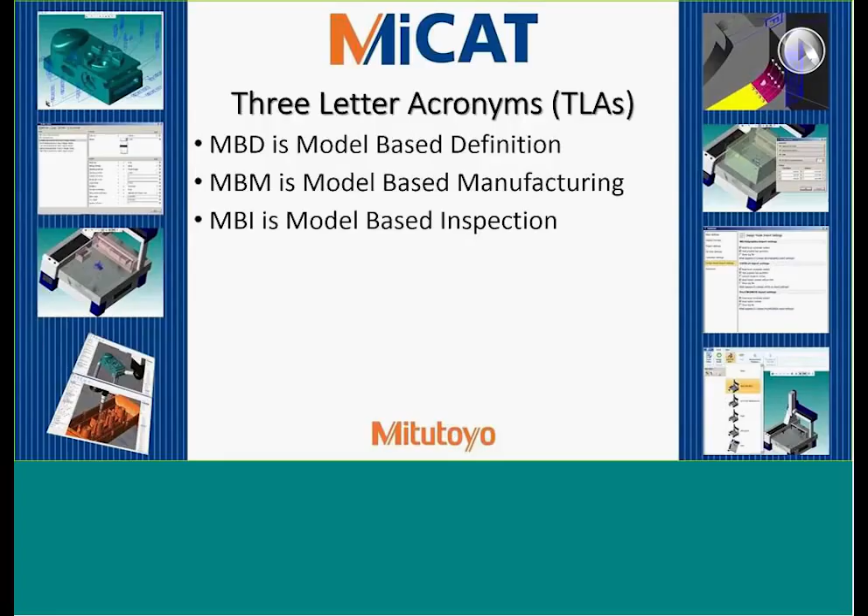The first one is model-based definition. You've also heard the term design model or CAD model with PMI, but MBD is the term of choice that we hear most often here in the USA. With MBD, there's model-based manufacturing, and I'm sure that's self-evident. The next one is model-based inspection. So these three, MBD, MBM, and model-based inspection, are the primary model-based terms that we use for what might be called model-based environment or model-based enterprise.

PMI is another term that you'll hear. It's product and manufacturing information. It's also that annotation in GD&T, and we'll talk about that in just a bit as well. The last of our TLAs is DME, a term that encompasses all of dimensional measurement equipment. These terms are going to be used throughout the webinar.

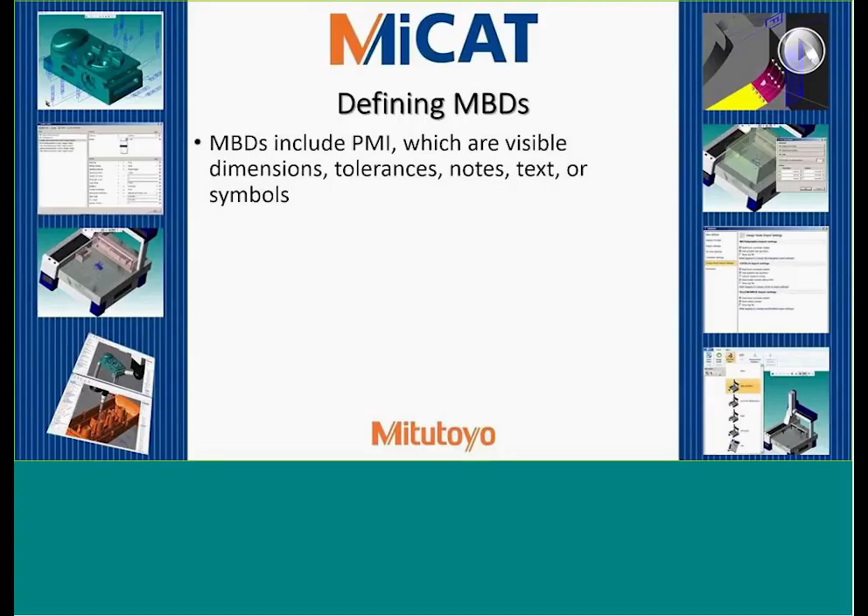Let's talk about MBDs first. What are they? So let's define an MBD. MBDs include PMI, which are visible dimensions, tolerances, notes, text, or symbols. I'm sure most, if not all of you, have seen this kind of annotation on a 2D drawing or 3D CAD model before. MBDs are specifically created by design engineering, but their use is by manufacturing and inspection.

Go ahead. There's a question. Please interrupt me at any time, Dirk, and I'll try to make sure that I answer questions as we go along.

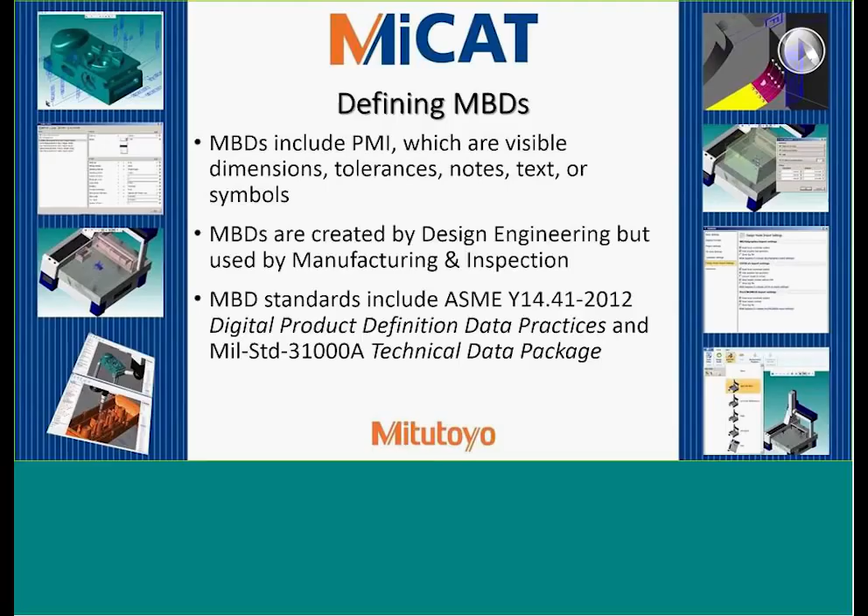There is something called MBD standards that I wanted to bring up as well. The two most prominent general standards are ASME Y14.41, Digital Product Definition Data Practices, and MIL Standard 31000A, Technical Data Package. So if you want more information about what an MBD is and some references and guidelines, I would steer you to these two standards as well as others that are available for MBD.

There are two kinds of PMI, and this is a critical topic for MBDs. The first kind of PMI is presentation PMI. It visualizes the PMI for the person.

It essentially, and I'm sure you've all seen this before, creates a three-dimensional drawing. And it may be organized by views in the CAD software. The other one is called representation PMI. It complements presentation PMI. So you have these two terms.

The first term is the visualization for the person. The second term is for the consumption by the software applications and the generation of the MBD by the software applications. It's also known as semantic PMI. And this, as I said, is what enables model-based inspection.

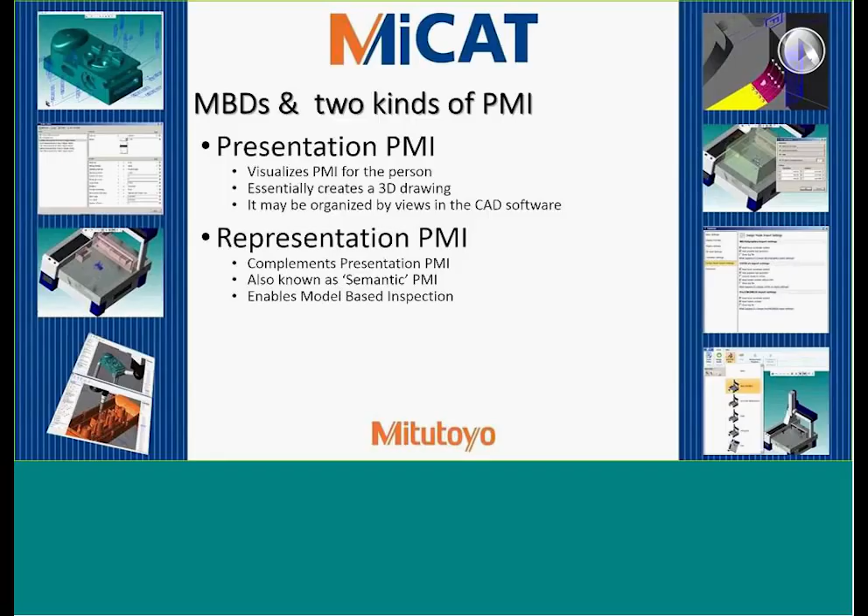This is a very interesting note from Joshua Lubell at NIST. He states, unambiguous representation and presentation of PMI are critical for the digital product definition. In other words, we need both for the machine and for the person. They need to be there, they need to be synchronized, and they need to be complete and unambiguous. And those are considerations when a CMM might use an MBD for model-based inspection.

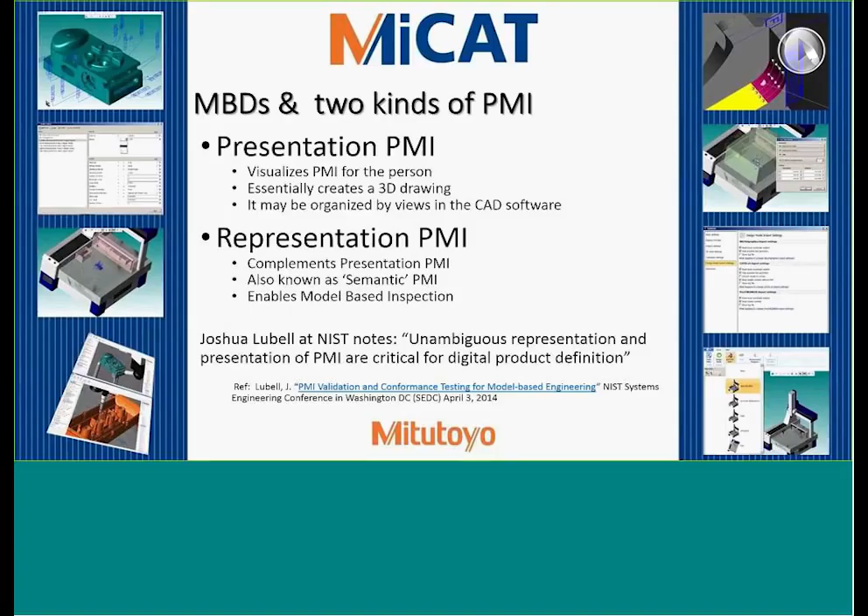There's a process, a journey that I think all of you would recognize here. The journey is we all started off in a drawing-based workflow where the 2D drawing is the master. There's an intermediate process, a model-centric workflow where the 2D drawing is the master and the 3D model provides part geometry. This is probably the most predominant workflow now as we move from drawing-based to model-centric.

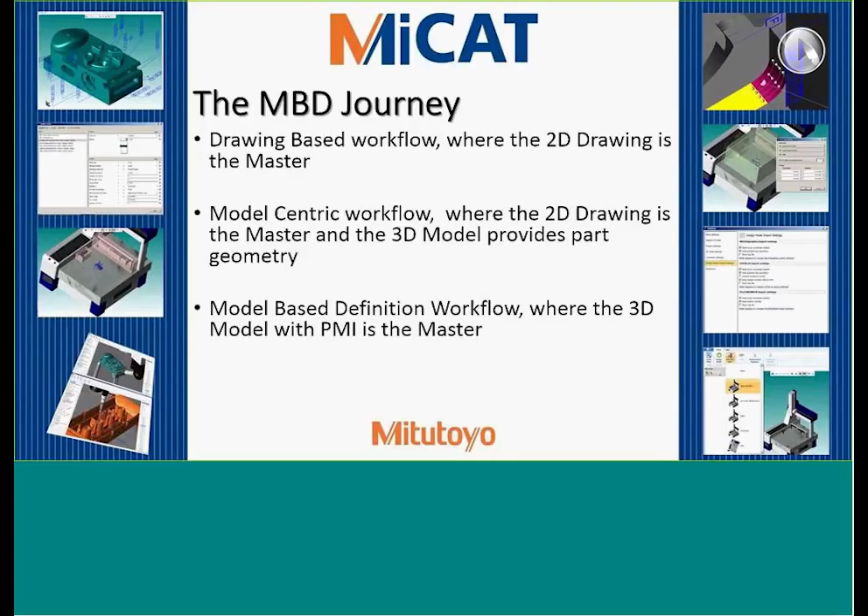But we're moving further to a model-based definition workflow where the 3D model with the PMI is the master. So you can see a progression from drawing-based to model-centric to model-based definition. And we'll be addressing really the second and third of these, model-centric and model-based definition, in today's webinar.

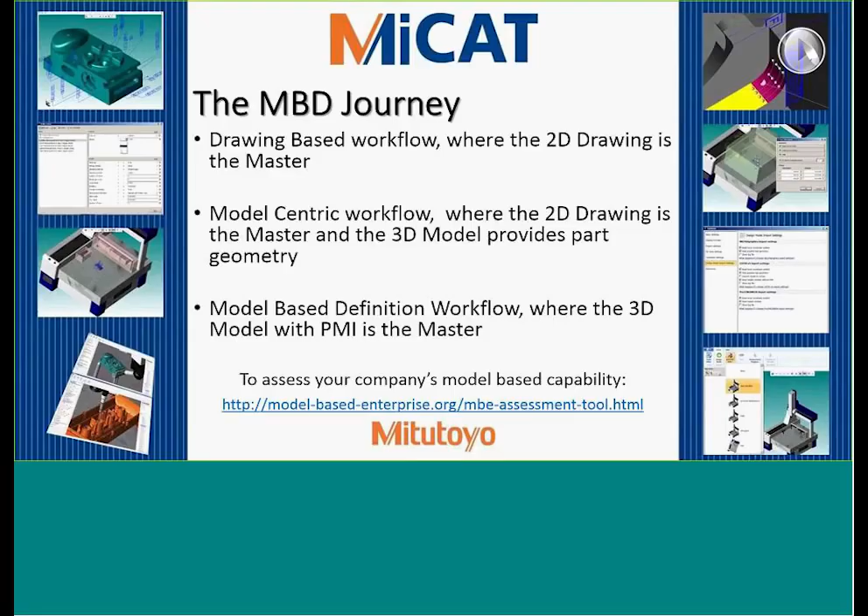If you want to know more about this journey, this is a reference that you might want to go to. It's at the Model-Based Enterprise website, and it's an assessment tool that you can take for your company to see where you are in this progression to model-based workflows and model-based enterprise.

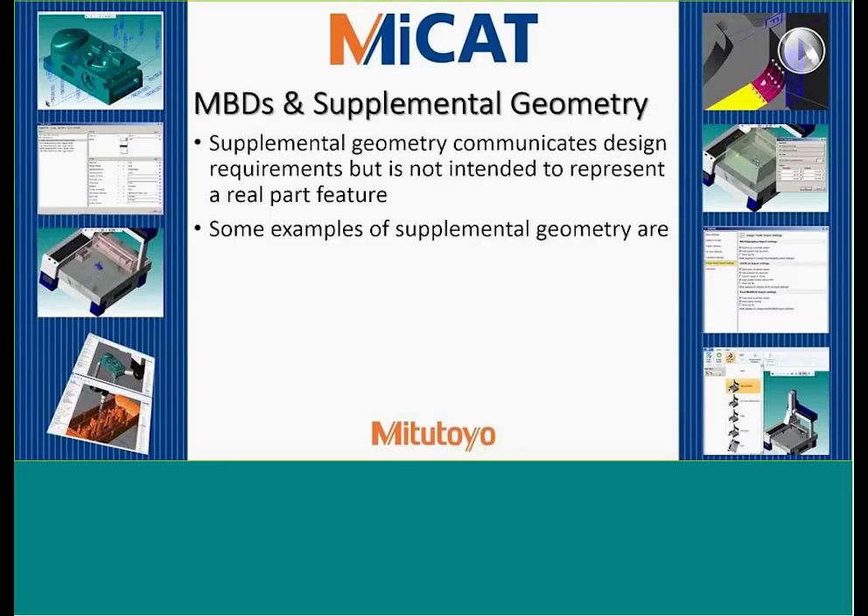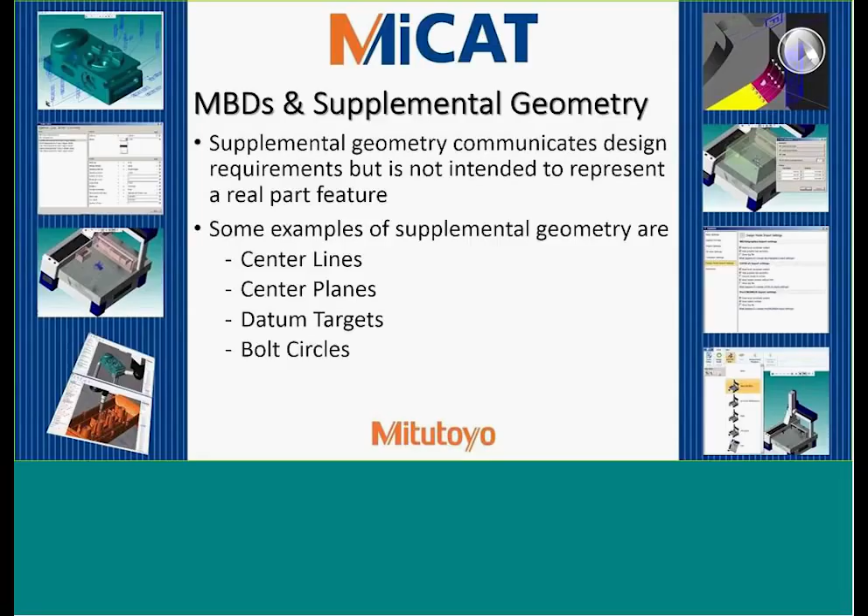Questions before we proceed? Dirk, anybody about model-based? No, I don't think we have. Well, actually, here's a question I have. Let me just throw this out. As we're talking, I was wondering, why is PMI actually needed? Maybe your CAD files already have your dimensions and tolerances all worked in there.

Good question, but PMI is actually the dimensions and tolerances. So the GD&T that you see, the notes, the annotation, that's all part of this larger umbrella called PMI. So PMI is necessary, and certain kinds of PMI are essential for model-based inspection. You can see these three CAD models, and they all have GD&T, which is a type of PMI, and this is the kind of MBD that's necessary for model-based inspection.

I'm not super familiar with all this, so maybe some of our attendees aren't either, but is PMI something separate that's embedded inside the CAD file, or suppose they just had their CAD file marked up with GD&T stuff. Is that the same as having this information embedded in PMI? Yeah, I understand that distinction.

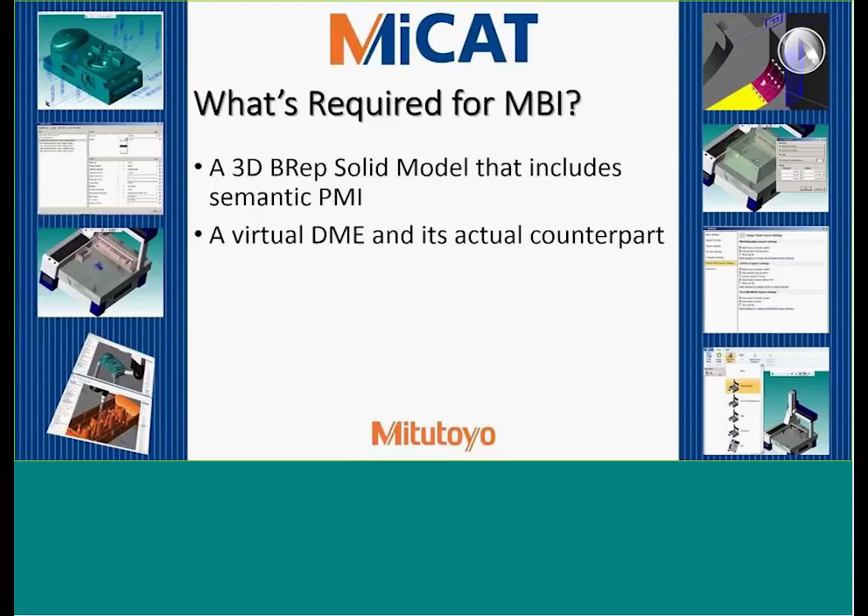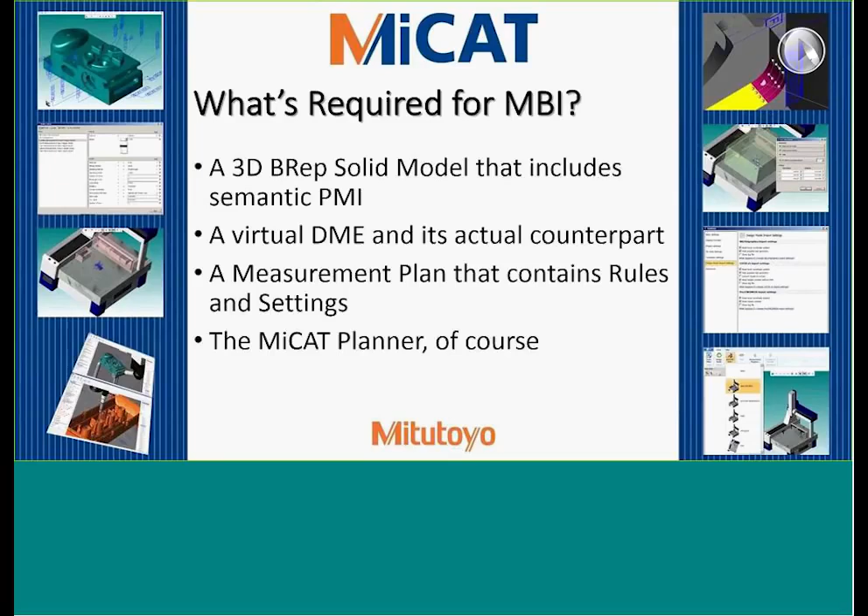We need what's called a virtual DME. This is a virtual process where we take information that's virtually designed as a CAD model and use it with a virtual DME, dimensional measurement equipment. But obviously, to inspect the real part, we need the physical, actual CMM as well. We also need, especially for automation, a measurement plan that contains rules and settings. And last but not least, we need the MiCAT Planner, of course.

So moving on, let's take a look at each of these categories. Dimensional measurement equipment. Model-based inspection is most often used with CNC DME. CNC are automatically programmed machines and automatically executing machines. It can be done with manual machines, but the biggest benefit is with CNC DMEs. The most common CNC DME is the coordinate measurement machine, aka CMM. I think we've all heard of these machines, and you can see some of these in the Mitutoyo slides here, and we'll talk about these in a little bit as well.

And just to let everybody know that it doesn't have to be a new machine. Most current as well as new Mitutoyo CNC CMMs support model-based inspection, but they must have the additional option of the MiCAT Planner to enable this model-based inspection workflow. Okay, we'll move forward.

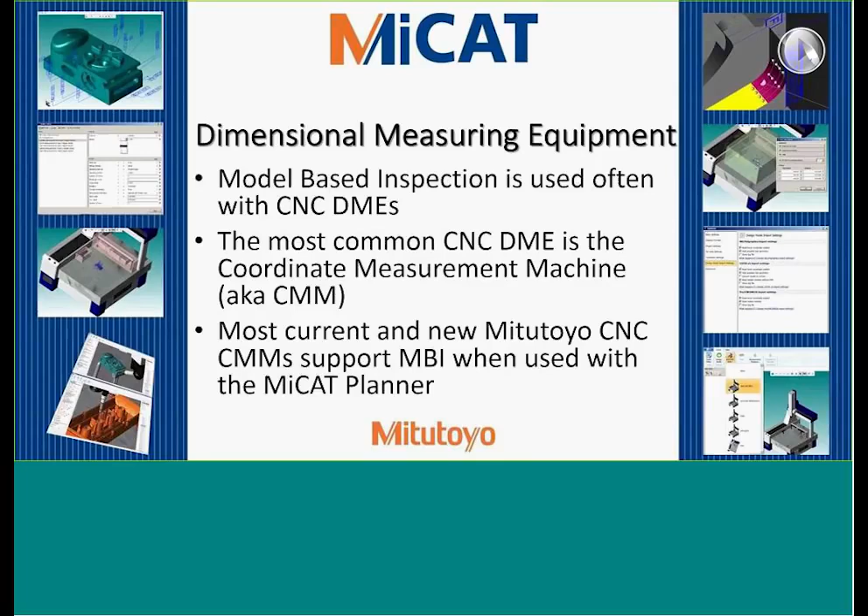Now we're getting down to some really interesting technology here. These are sensors for model-based inspection. And sensor selection plays an important role when matching rules and settings to features and characteristics of the MBD, or binding, to use that term, the sensor and the feature and the characteristic. The feature is a cylinder, the characteristic may be cylindricity. Now, what particular sensor do I use in a model-based inspection workflow that's most appropriate for that feature and characteristic?

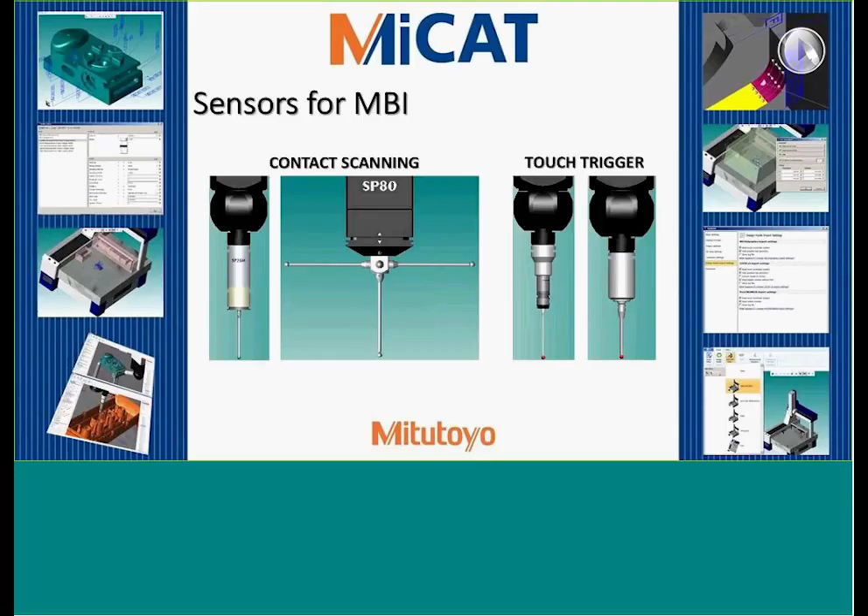We support, for our model-based inspection workflow, these kinds of contact scanning, very common sensors, as well as touch trigger sensors. And I'm sure you've all seen these before on typical CMMs.

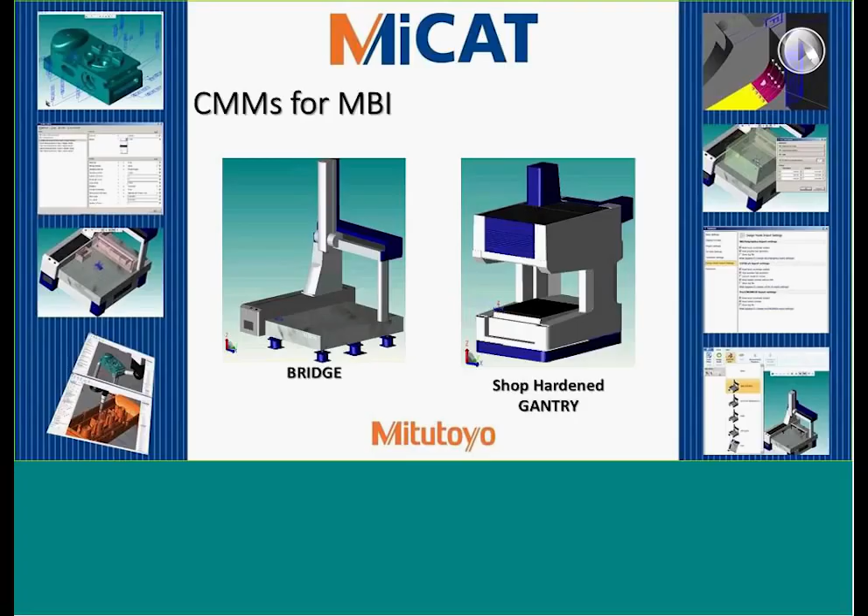Now, what kind of CMMs does Mitutoyo offer that support model-based inspection? We have bridge machines. That's probably our all-around workhorse for parts and assemblies. We also support horizontal machines, and we also support shop-hardened gantry machines as well. So you see two examples of vertical axis machines. One is a typical workhorse, and one is actually used for inline or nearline production.

What other CMMs do we have available for model-based inspection at Mitutoyo? We have also shop-hardened horizontal arm machines as well. And last but not least, the change racks, modules, and styli all contribute to this virtual DME, virtual CMM environment that enables model-based inspection.

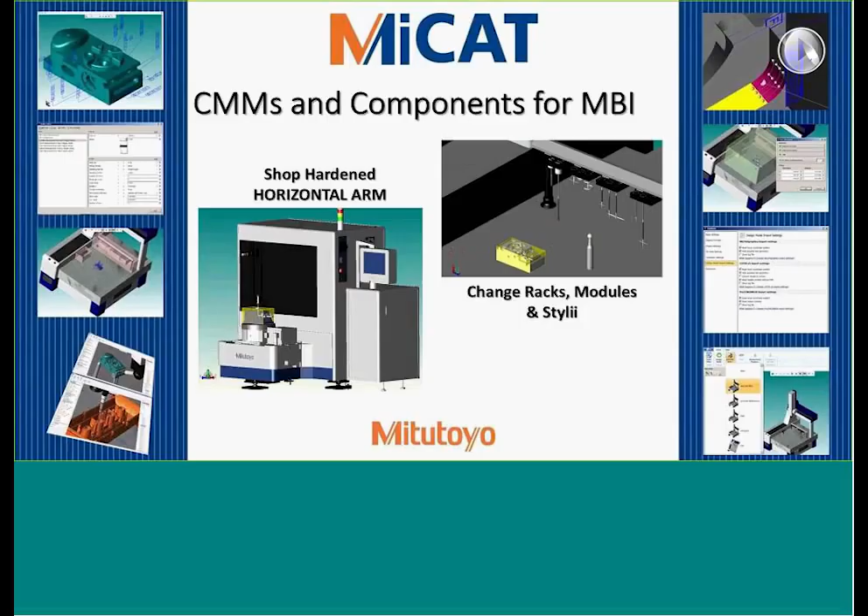Now, that was a pretty quick overview of Mitutoyo's hardware and CMM and DME technology in general. But the key thing is we have a virtual CMM that's used in the model-based inspection planning and program generation phase. And then we have the actual CMM that's used in the execution of that program that was generated in the initial model-based inspection workflow. Might anybody have any questions about that before we proceed?

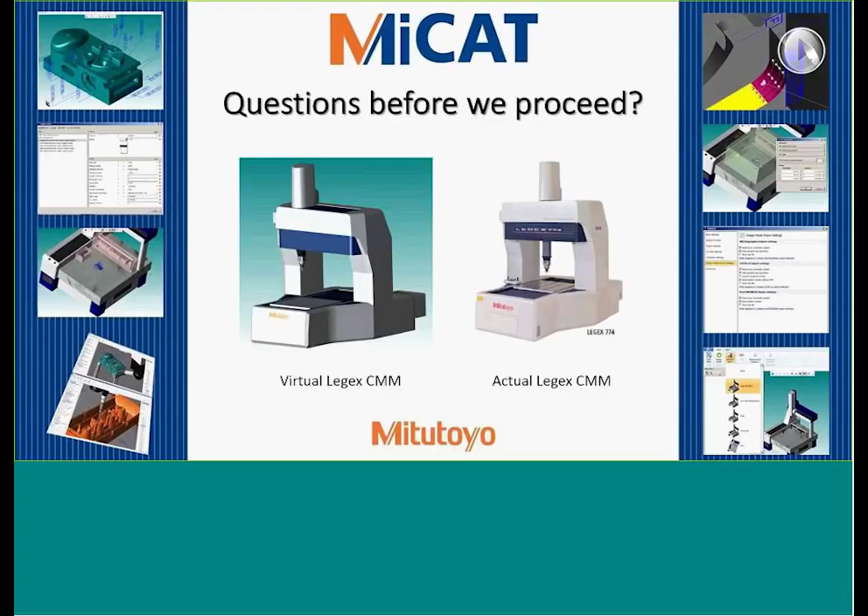Yeah, there's a question. I think it's still a spinoff from a question I asked earlier. Is the GD&T we see, and I think I'm reading this right, created in a CAD system? And I believe we already said that was the case. So that's the most common case, that the model-based definitions and the GD&T are created in CAD. But, and we'll see that a little bit later in the webinar, there may be no GD&T on the CAD model, and we do have a way to actually measure the part without GD&T, as well as add GD&T to the part, because that situation exists very commonly as well, Dirk. So yes, both, okay. All of the above. Okay. And we'll take a look at that.

So now what is the MiCAT Planner? I mentioned the MiCAT Planner is an important part of model-based inspection. It's a measurement program software from Mitutoyo that enables one-click automated generation of CNC CMM programs. And it's the last piece of the puzzle that really makes model-based inspection practical and worthwhile. Mitutoyo's been in a feature-based CAD world for quite some time, but moving forward into model-based really takes it into the 21st century.

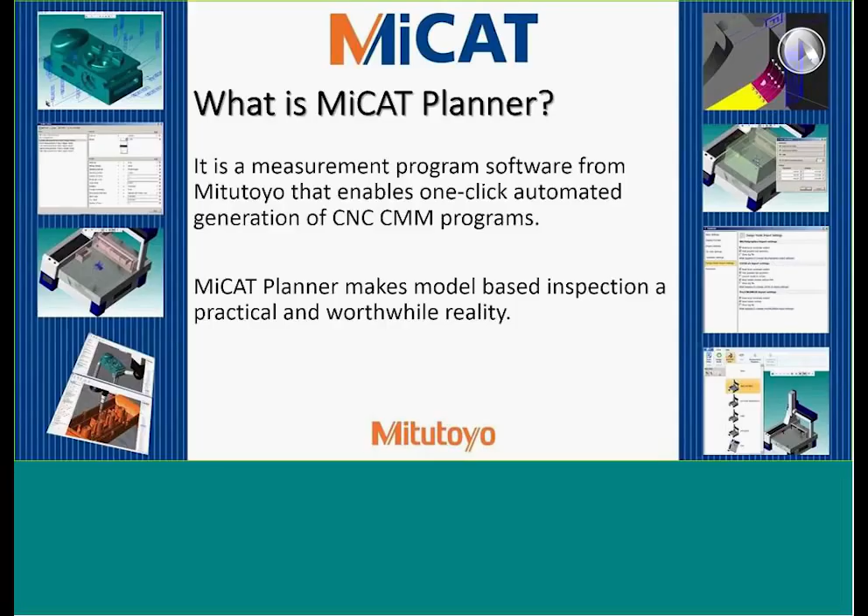There are some upstream activities that need to be considered, as we talked about earlier, to support the MiCAT Planner's model-based inspection solution. Where do these models come from? They may not come from a CAD system. They may come from a CAM system. They may come from some other software application.

But who's doing the 3D model and how are they doing the 3D model annotation is something that needs to be considered. Now, that's overall beyond the scope of this webinar today, but as the downstream users, as we call ourselves, of model-based inspection, we need to know where these models come from and who did the annotation, just to make sure that we understand and the software understands what it needs to do.

There are procedures, then again, which are beyond the scope of this webinar in terms of how these models are handled. Also, how are these models validated? That's an interesting and very important question as well. And finally, something that needs to be considered by any corporation or by any user of model-based inspection is what are the rules, what are my best practices?

Any CMM programmer who's done this for a while has rules of thumb. There may even be documented procedures. This is what we do when we measure this feature with this characteristic. So the MiCAT Planner really is best used in a rules-based environment. If you don't have rules, the rules can be easily generated, as I'll show you later on.

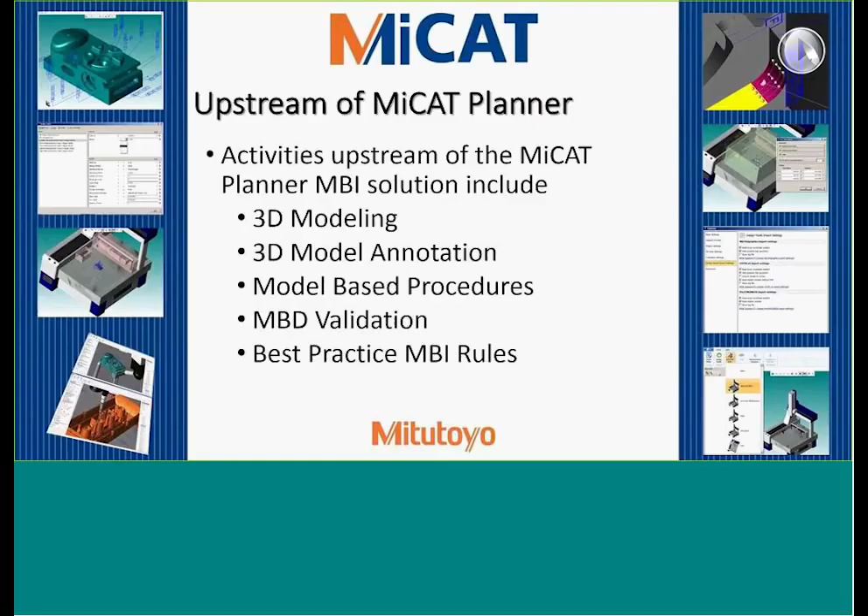User parameter settings. I want to do this, and I want this to stay in this state in the planner until I tell you otherwise. All software has parameter settings, and the planner uses these settings and retains these settings, so it customizes and adapts to how and what you want to do in terms of program generation.

Another key, and we'll see its power in a little bit, is user-defined rules. We provide, if you will, a starter kit. It's just a default, but the rules themselves really enable this automated and optimal generation of CNC CMM part programs.

This may be very important for a large company that might have facilities in other parts of the world, and they want to have a consistent and optimal way to be able to program parts and sub-assemblies that are made overseas and bring them in, or even within a far-flung enterprise within the USA as well.

Display format. This allows one to set up how many decimals to see the length, angle, vector, speed, and it ensures that the display requirements for different parts of various manufacturers can be modified easily as needed.

The next one are project settings. You know, what you see here, we talked about some simple out of the box. They're not simple, they're very smart, but I guess you would call them simple.

I'm simple, but I'm not smart.

These are touch trigger templates and contact scanning templates. And these make it easy to have a starter kit to say, well, here's what I want to do, here's what I start with, and here's where I want to go. 3D view settings: maybe I don't like the green for my first measurement point or red for my last, you can change them here.

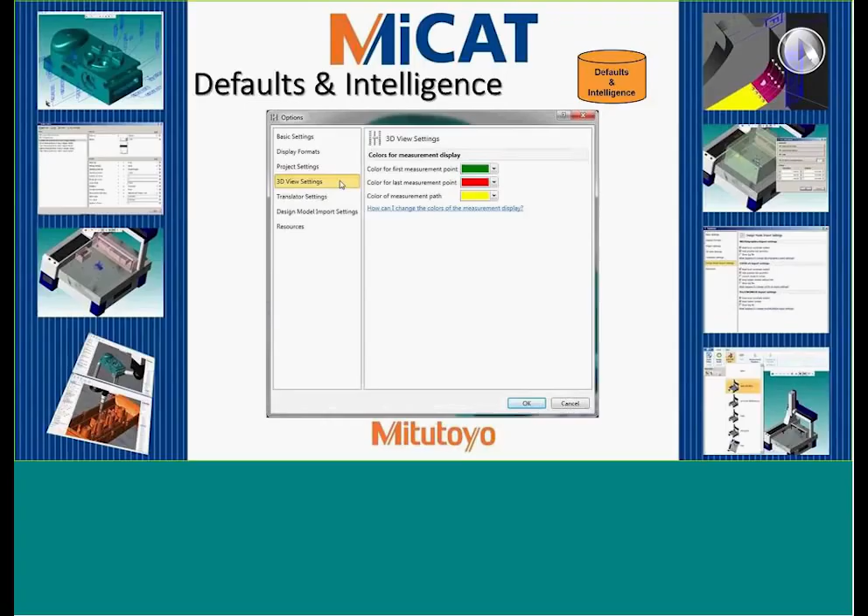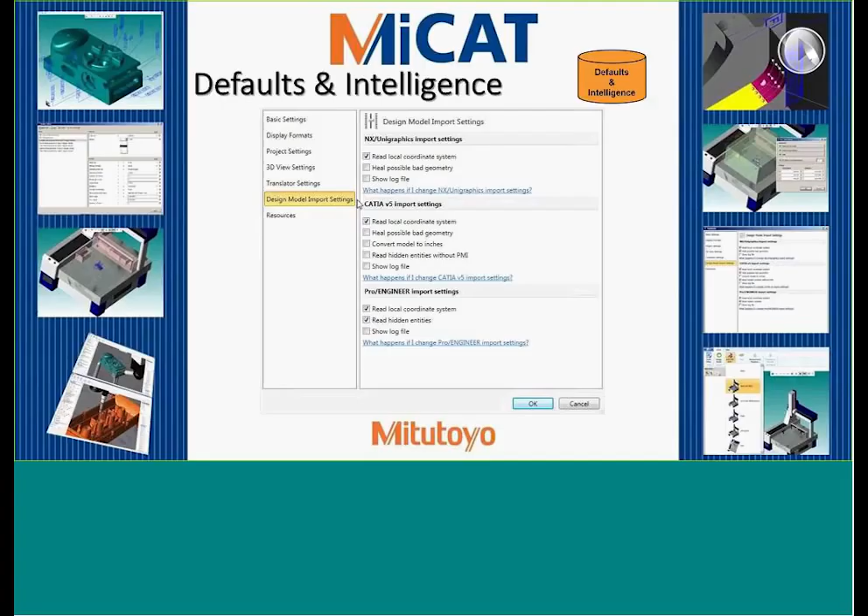Translator settings: these are settings that are applied when one generates a GEOPAK part program. Design model import settings. This goes back to your question, Dirk, about what kind of CAD file formats can I import? And you can see some options here as well. And those are the settings, and now we're going to look at program generation options.

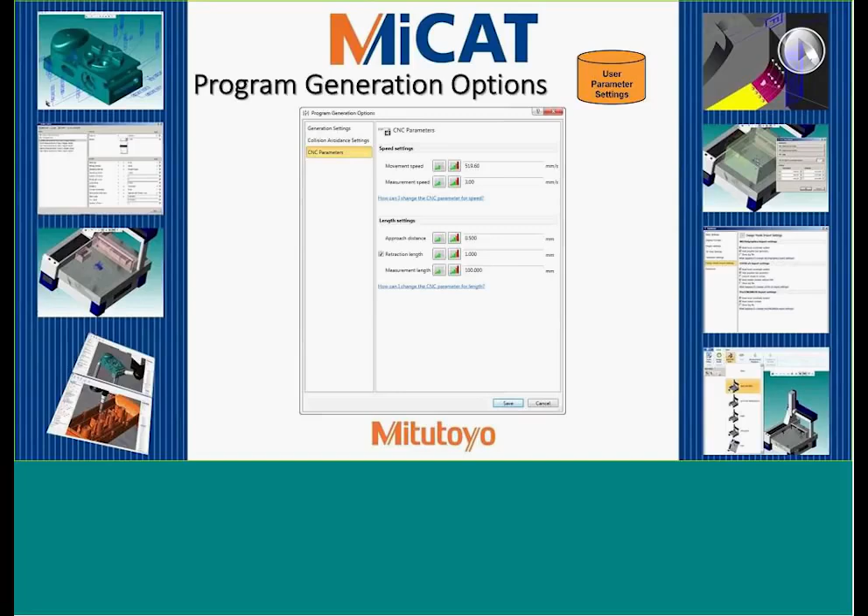And finally, as our friends in the CNC CAM world might want to say, feeds and speeds. These are settings for measurement speeds and for approach and retract and measurement lengths. So those are settings, and they're a powerful set of parameters that one could easily modify as needed. But the real superpower here comes into these user-defined rules.

This is the MiCAT Planner Rules Editor, and the Rules Editor establishes rules for features and characteristics. And we capture the best practices, whatever those are, it's not for us to say, for optimal inspection and consistent results. And these rules can be specific to a part, to a family of parts, or to a company. And I've seen a lot of companies starting to evolve a general set of best practices.

Here's how we do this, and here's what's worked for us well in the past. All of this information can be captured and applied automatically through the Rules Editor. And you can see the Rules Editor is very conversational. I mean, I can understand it. It's not some complex programming language. It is, if this, then do that. And I'll detail that on the next slide.

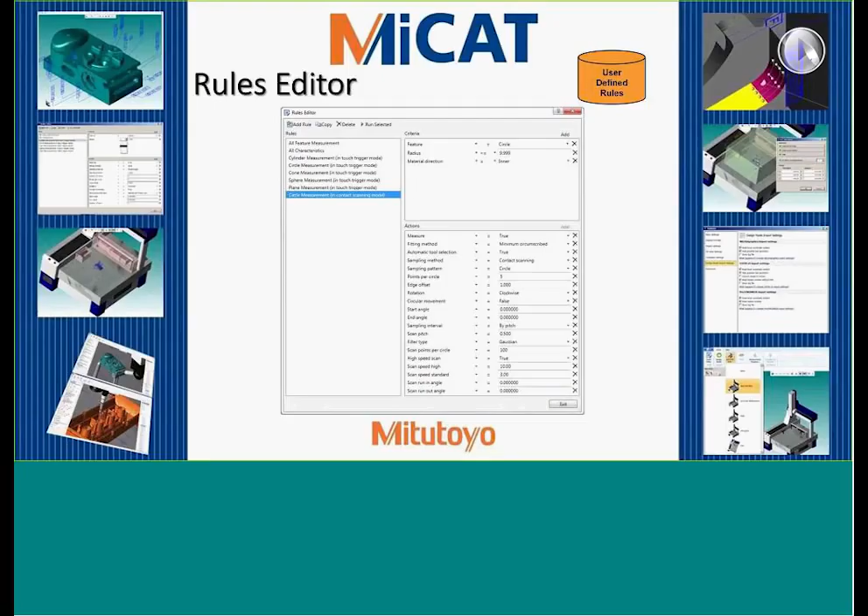So you see in this particular case, we have on the very top something called criteria. And if you can't read it, I'll read it for you. Criteria for an inner circle measurement with a radius of less than or equal to 9.999. It's the if part of the rule. It's criteria. And the then part of the rule is actions. And by the way, there can be one or more criteria, and there can be one or more actions.

And the actions define the parameters to be used for measuring all circles in the design model that meet that criteria. That set of criteria and that set of actions are contained in that one rule that's highlighted. It's the circle measurement in contact scanning mode. So the box on top is criteria. The box on the bottom are the actual specific actions for that rule.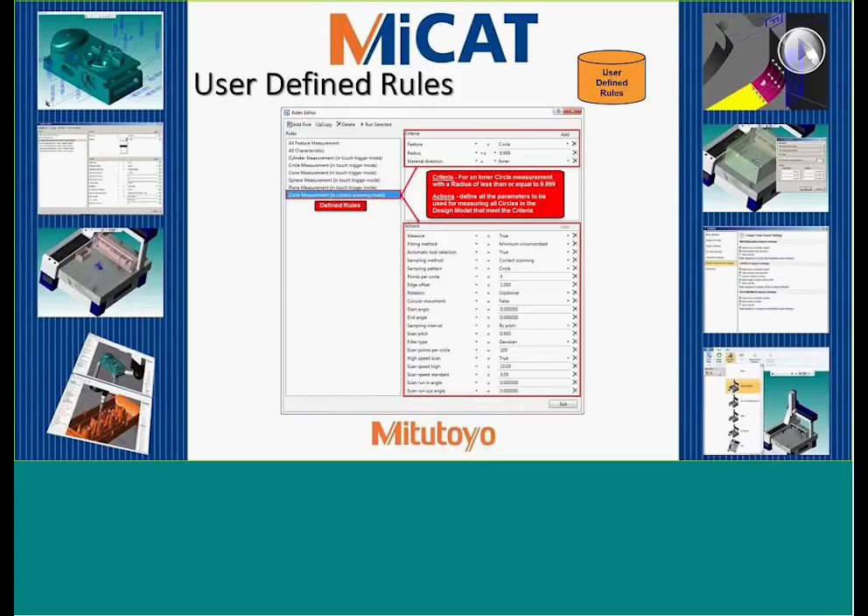Let's look at an example of how to add a rule, a little video you can see. And we're highlighting cylinder measurement in scan mode. But we're going to add a feature here, and you can see how quickly and easily it is to add default values for that.

So feature equals cylinder, actions equal measure true, fitting method mean, minimum zone, minimum circumscribed, etc. Sampling method touch trigger. And you can actually do it quicker than I can talk. And it's a very quick and easy way to define any new rule that you want to implement in the MiCAT Planner. Number of lines, points per line, and it's all context sensitive.

So if we're using contact scanning versus touch trigger scanning, the rules themselves are applicable, and it gives a pretty good indication of how you might want to use, in this case, scan mode, the scan parameters associated with the contact scanning. Changing scan pitch. The X on the right-hand side says delete a rule. Delete an action, is a part of a rule.

And Larry, can you get a little bit closer to your phone? Sure. Sorry about that. Oh, perfect. Thank you. No sweat.

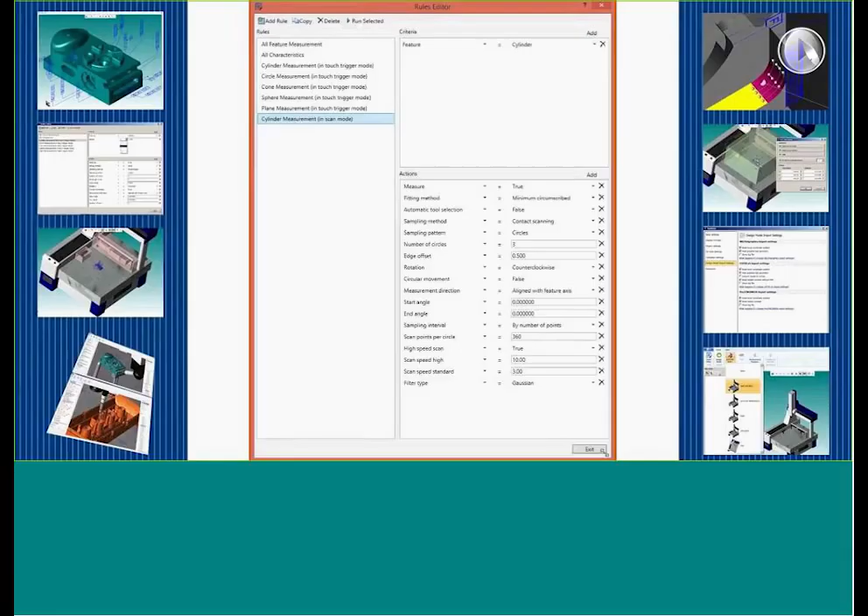Okay, we're going to now show you an end-to-end workflow in under 6 minutes that starts with models, with DMEs, and walks all the way through to part program generation and execution. We're loading a part. It's an MBD, I say part, but the model represents the part. And you see a three-dimensional model with semantic and PMI, as well as presentation PMI.

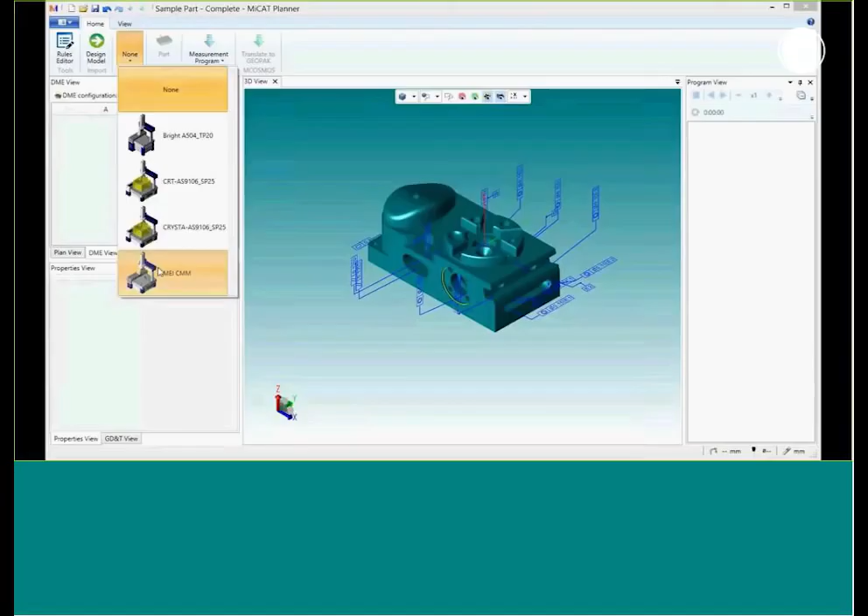We just loaded the virtual DME. You can see the DME configuration, all the tools available. And that plan in the plan view, that measurement plan, was generated automatically. Those red dots, those error messages say, well, I don't currently have a tool available for that particular feature.

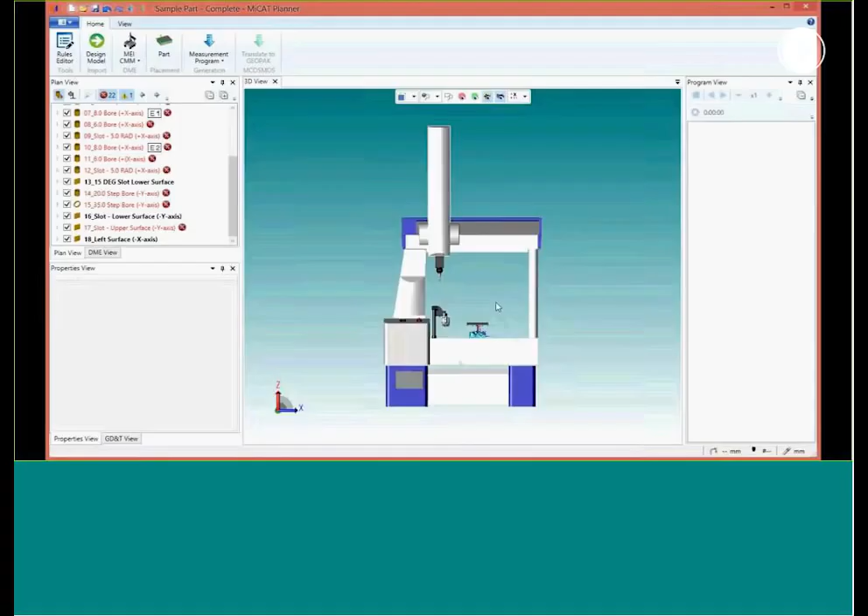So we're going to look at it in the front view. Let's zoom in. Let's take a look at the model and let's see this. Maybe if we move the model up in the air, can we do that? Yep, we can. And we're going to say here centered in volume. We'll move it up. This will give the DME, the CMM, access to more features for parts.

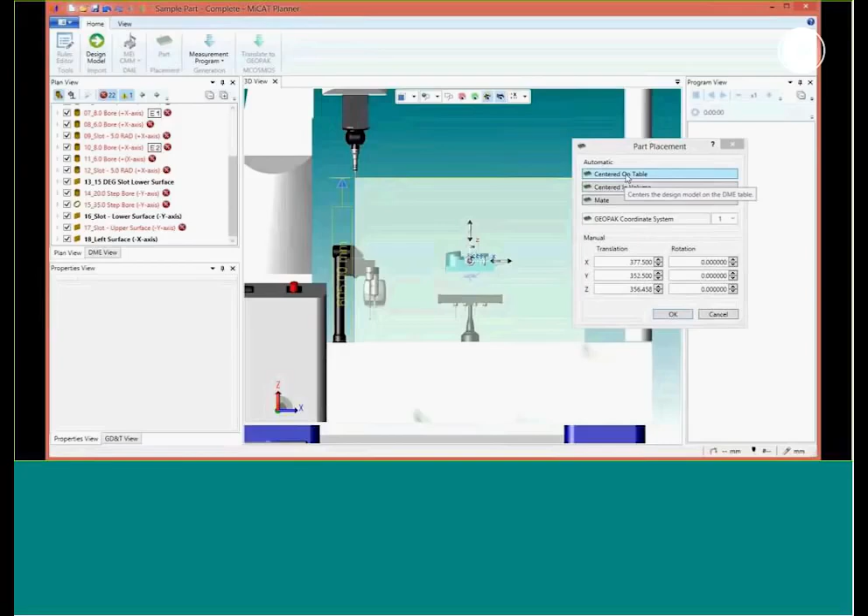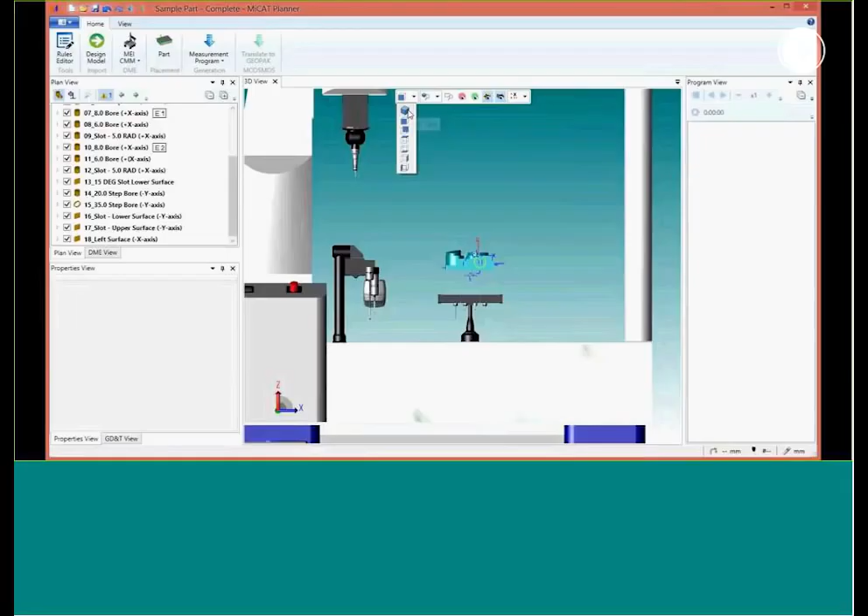And as soon as we say, okay, this is where I want to place this, I want to direct your attention back to the plan view. And now you can see it automatically recalculating what I can access with the available tools for that model with those features. And now all of a sudden you've gone from essentially half the features being measurable to all the features being measurable. That's the matching of the DME, the rules, the MBD within the plan. Very powerful process. Let's zoom in.

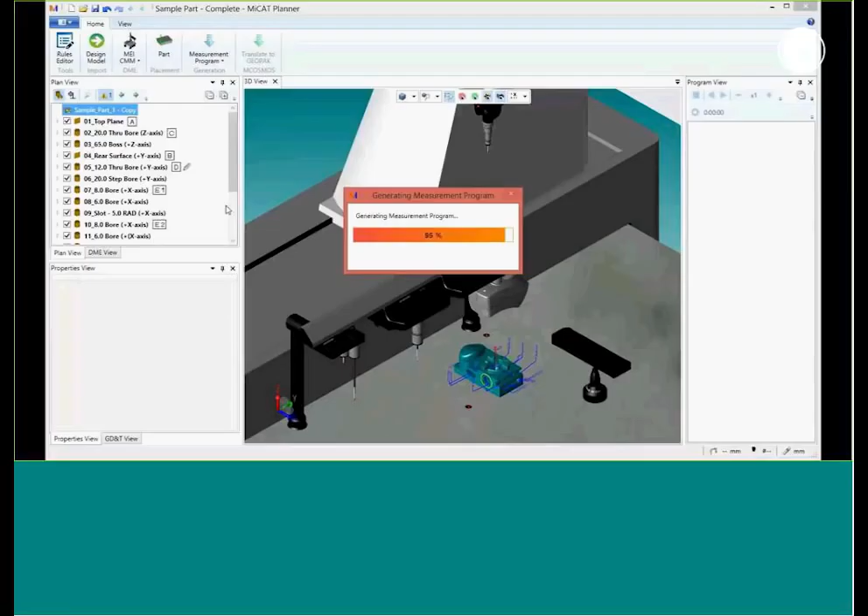Now, this is a one-click measurement program generation. So we're going from a measurement plan on the left-hand side to a fully defined measurement program in the program view on the right-hand side. We can now look at the path. We can display entity points, paths and points, selected points, all points, path.

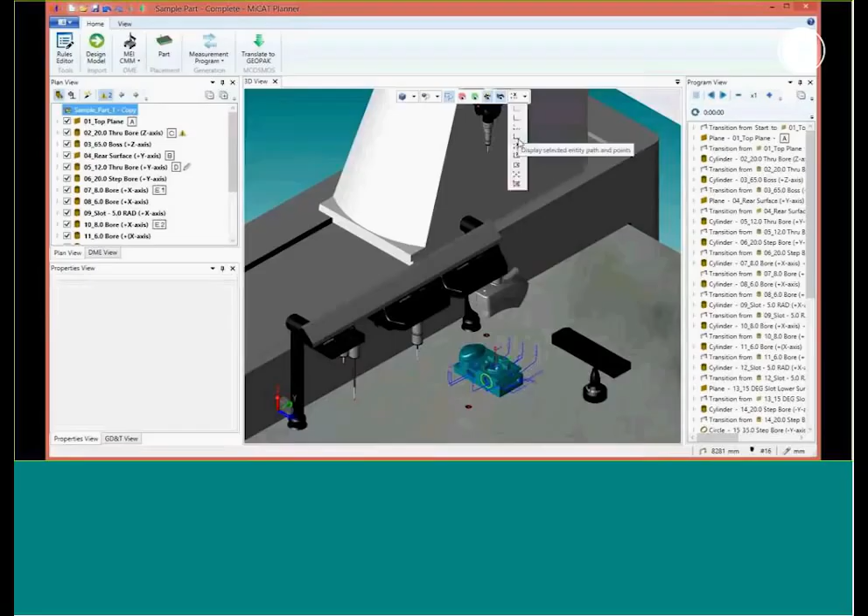And these are ways to visualize the three-dimensional aspect of the generated measurement program. And we'll take a look at these now. So by clicking over here on Start, you see the CMM moves to that position. Now we're going to do a simulation and animation. We'll crank it up, hit the speed, and play forward. And as you can also see where the cursor is, it's also doing a time estimation as well.

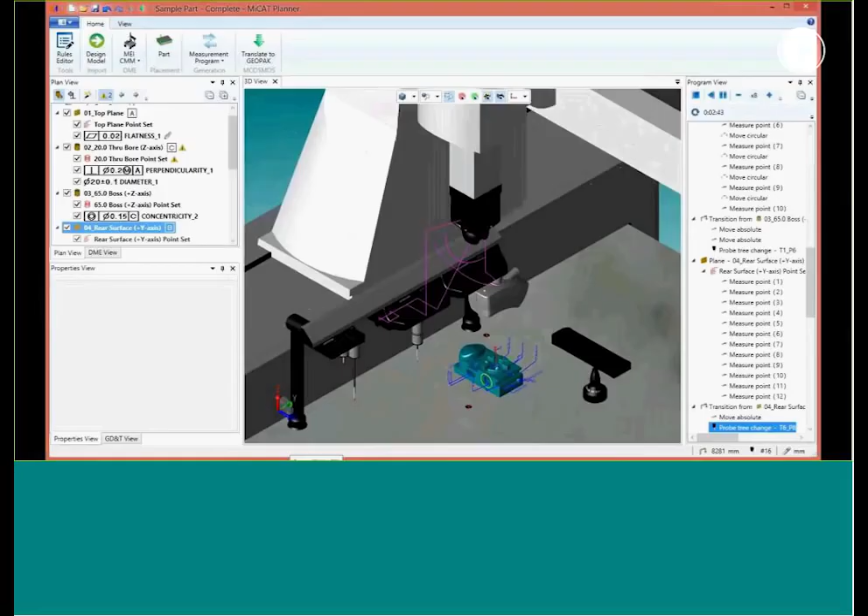This is a fairly complex program from quite a few features and characteristics. You can see on the left-hand side, it's synchronous in the plan view and the 3D view and the program view. That's one of the key advantages of the MiCAT Planner, its simplicity and its always synchronized operation.

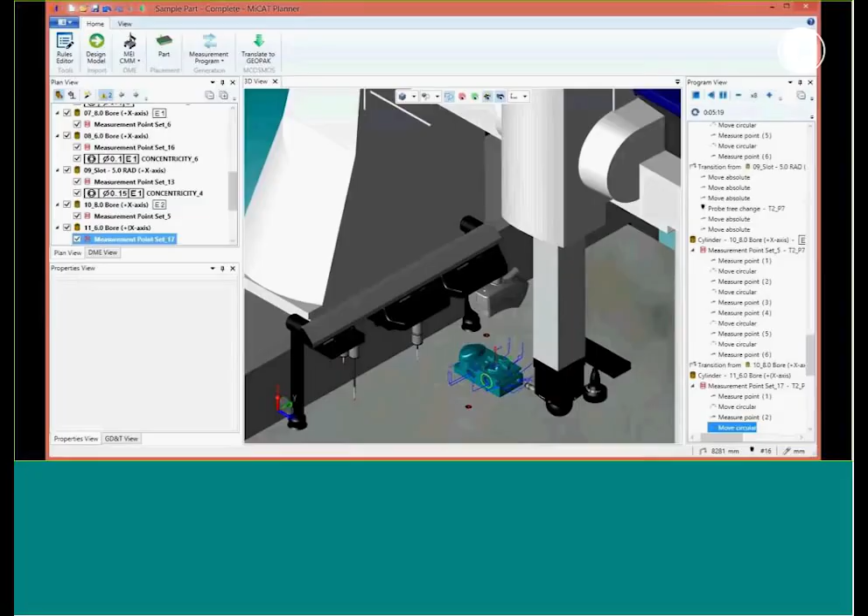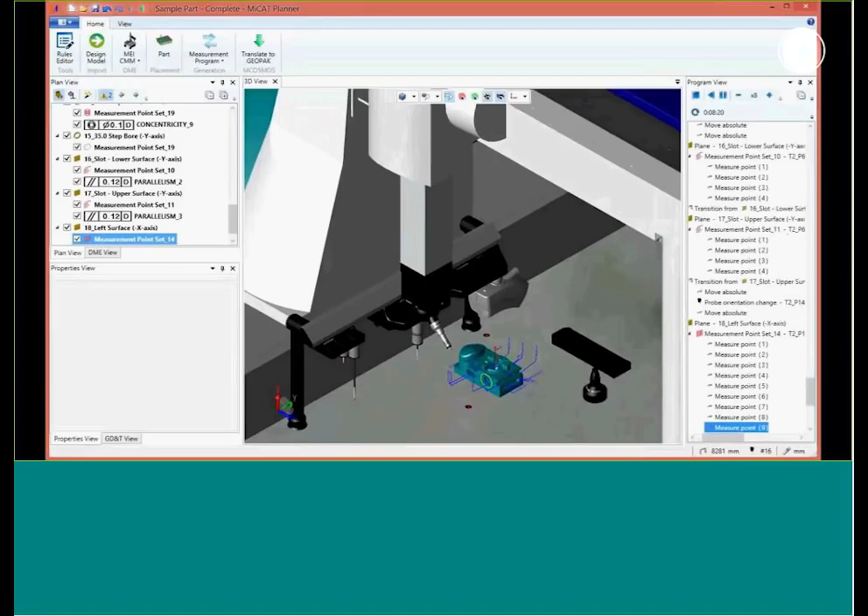So if you change something in the plan view or the 3D view or the program view, it updates the other views as well. And when you animate or simulate, you can see all three views, providing a synchronous view of what the virtual CMM is doing. The simulation is not necessary, but it certainly is something that the human likes to look at and make sure it's doing what you expect it to do.

Now we're posting. We're translating to GEOPAK, and you see sample part complete. That was the actual post-processing. And here's the program that was generated. And this is in the GEOPAK editor. This is the native execution engine for MCOSMOS. And you can see what was generated from that plan through the measurement process to the program generation option.

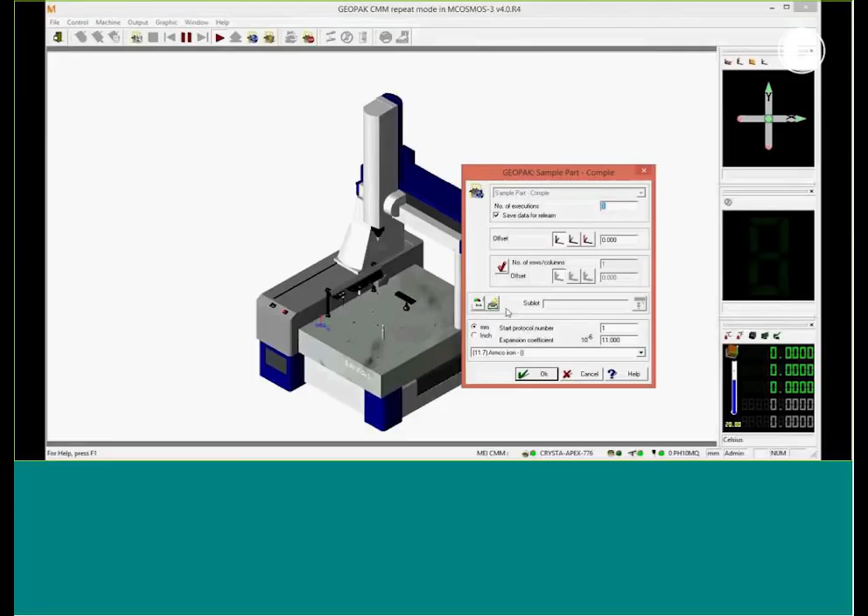So we've looked at it in the editor. Now we're going to do a virtual execution. I'm not hooked up to a CMM here in my office. I don't have one of those, though I'd love to have one. But I do have a virtual CMM, and that's what we're going to execute as well. And this proofs the program in a certain way, saying, yeah, logically, this will execute, and in that time, it also generates from the nominal information an inspection report.

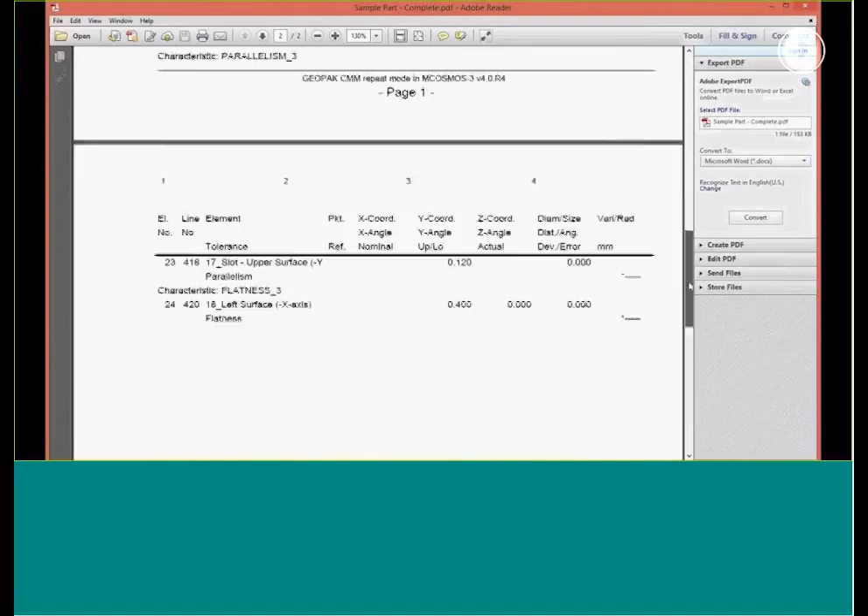We're looking at it in the 3D view, and that's the three-dimensional element graphics of elements view of the execution of that part program. Now that was all under 6 minutes, and it's something that we're very proud of. It's not instantaneous in the sense that it takes zero time, but compared to old methods, we're moving at maybe a 95% reduction between what was done previously and what is being done now, especially if you look at a drawing-based method.

Yeah, Larry, I was going to ask about that particular part you were doing. Can you tell me how long might it have taken somebody to manually create that part program as opposed to the few minutes that it took to do it with this system? We're guessing on the order of 4 to 6 hours at least. Okay. I'm pretty slow. It might take more for me, but yeah, it's hours, sometimes days instead of minutes. For a super complex part, yeah. Okay. And especially as the part gets more complex, I think the benefits scale as well.

It does require a PC. We're not running a supercomputer here. It's just our standard PC, but 64-bit and a suitable graphics card.

Okay. Let's move on. So what are the tasks automatically completed by the planner? Well, part setup information is provided. I think you saw that in the first part of the program that was sent to GEOPAK. Operator warnings, they're optional, on, off. Do I want to warn the operator when the probe is going to exchange a stylus in the probe rack? Positional moves are tasks automatically created. Measurement commands, measure this point, measure this circle.

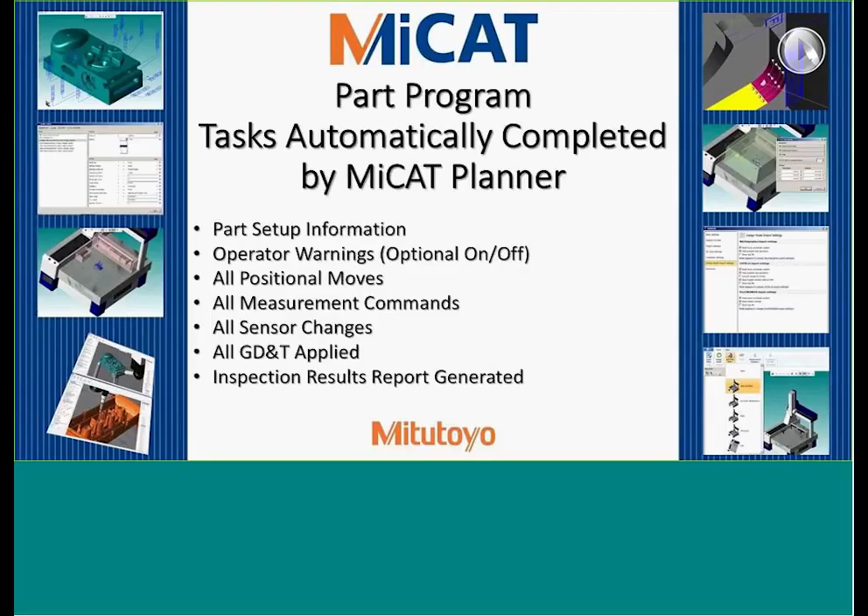Sensor changes, all GD&T is applied. That's transferred as well, as you saw in the program, and all the way into GEOPAK, where the GD&T that's associated with a feature is created in the part program and executed when the part program is run, and then inspection results reports generated. So we're pleased that we can offer this kind of capability to reduce what took hours to minutes.

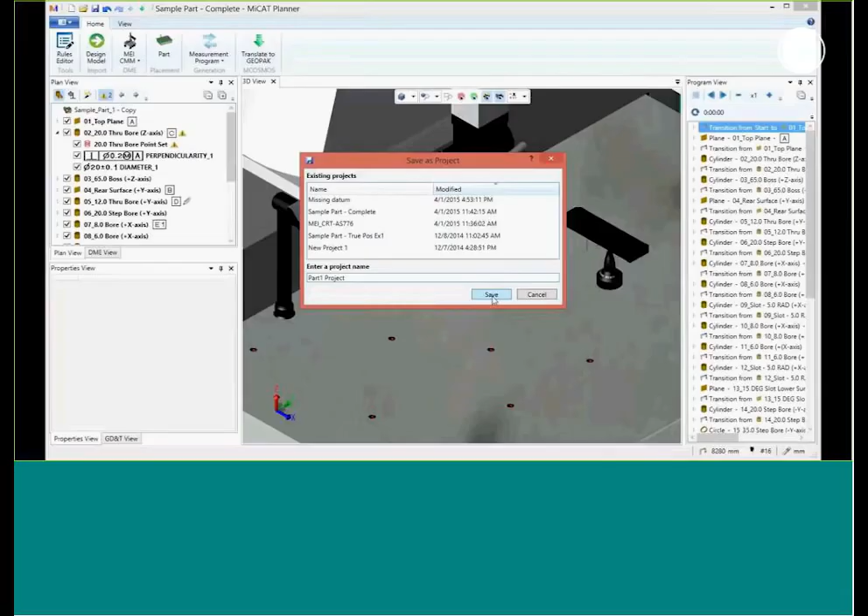So one key issue now is how do you manage projects within the MiCAT Planner? And this is a video that will show. And we're going to say, okay, let's save this as a project. The project is everything. It's the DME. It's the associated MBD and any changes to the GD&T. It's the rules and settings. They're all saved as one structure. You don't have to be a rocket scientist to know how it works, it's just being done in the background automatically. So we just saved that entire project for that particular part, that particular DME, and that particular rule set.

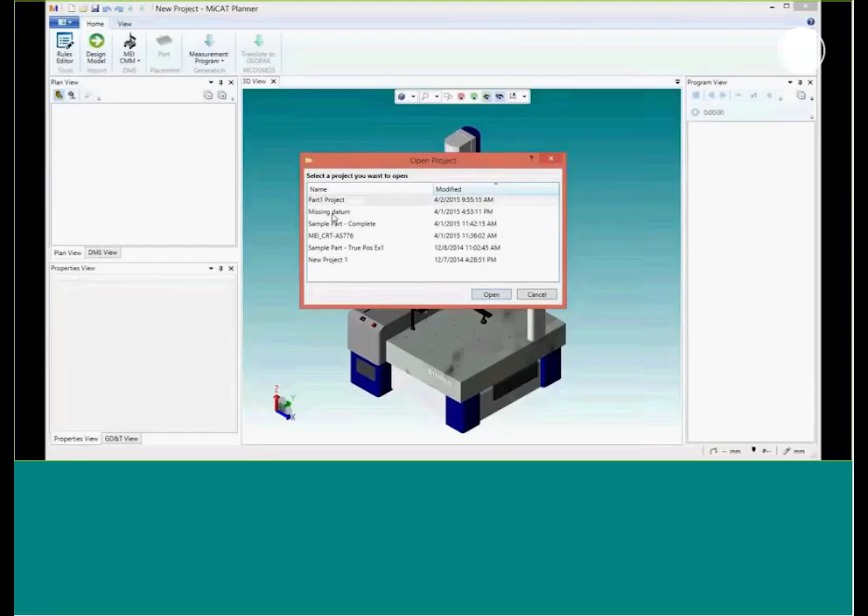Now we'll say create a new project from default. So we're starting in default condition. But let's just go back and take a look and reopen that same project again that we just saved. And you can see everything's being done. It's quite fast. And it goes back to the same state where it was when you saved it. So everything's saved automatically. We don't have to worry about the CMM, the rules, the settings, and the model-based definition. That's handled by the MiCAT Planner.

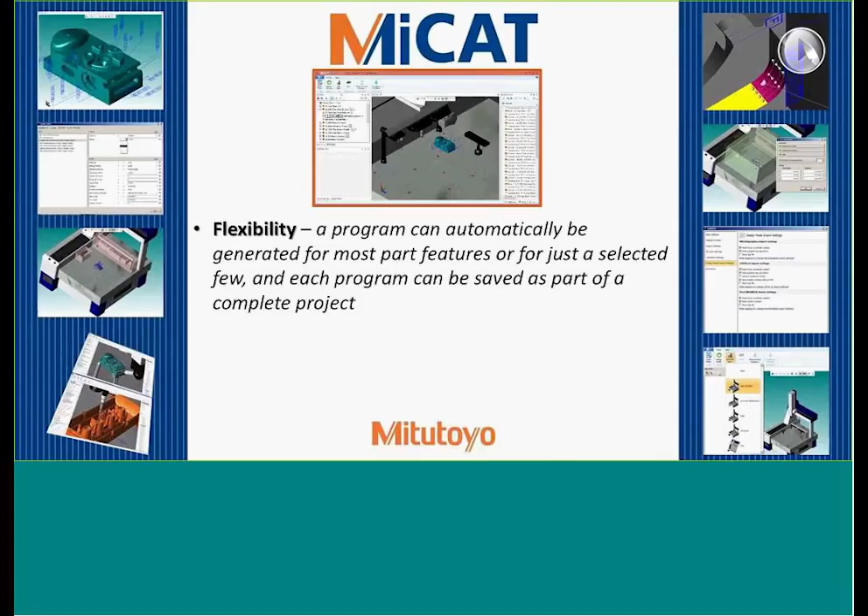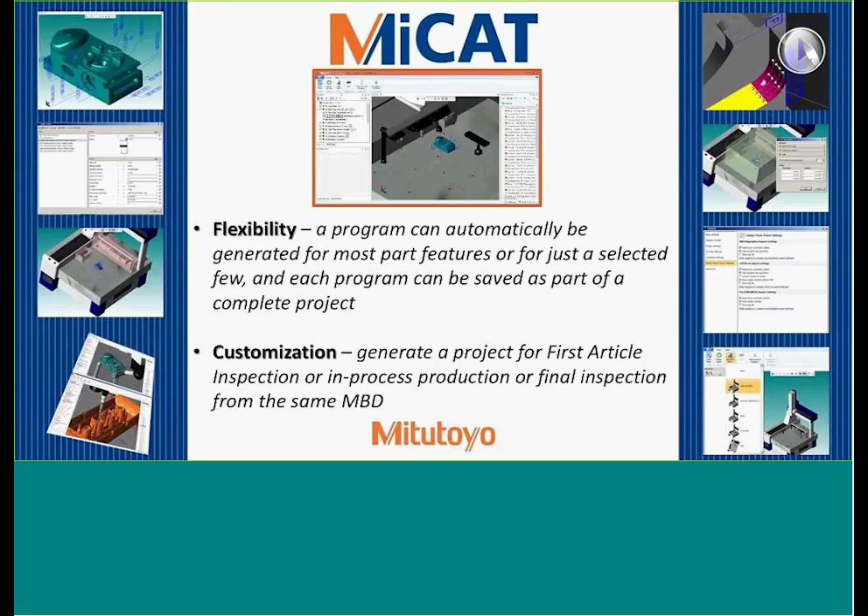Okay? And that's flexibility. That means a program can be automatically generated for most part features, or as you can also imagine, just a set of part features. And each program can be saved as part of a complete project. It also allows you to customize a project, maybe for a first article inspection, or maybe for an in-process production operation, or maybe for a final inspection from the same MBD. So the same project can be modified and resaved in a different project name that might be for final inspection as you worked from in-process inspection and from first article inspection.

This term, and this goes back to what you were talking about before, Dirk, is associativity. And this is showing that we maintain associativity between features, between characteristics. You see that plane? And we can modify these, by the way, and I'll show you that in just a second. But these associative elements in the planner are maintained automatically. What point set am I using?

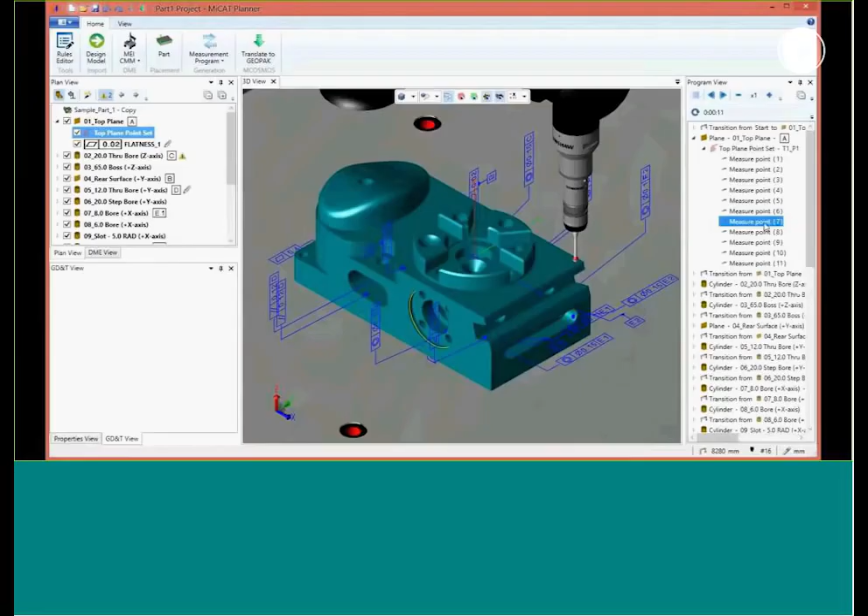So as I work, I want to look at an individual point. All of this is done. You don't see a lot of complicated GUIs and things like that. It's just there and it just works. You can see when we clicked on flatness here, it highlighted the flatness GD&T callout. So this associativity allows you to locate and view the relationships of the features and characteristics quickly and easily. So you can navigate through this fairly complex process without getting lost.

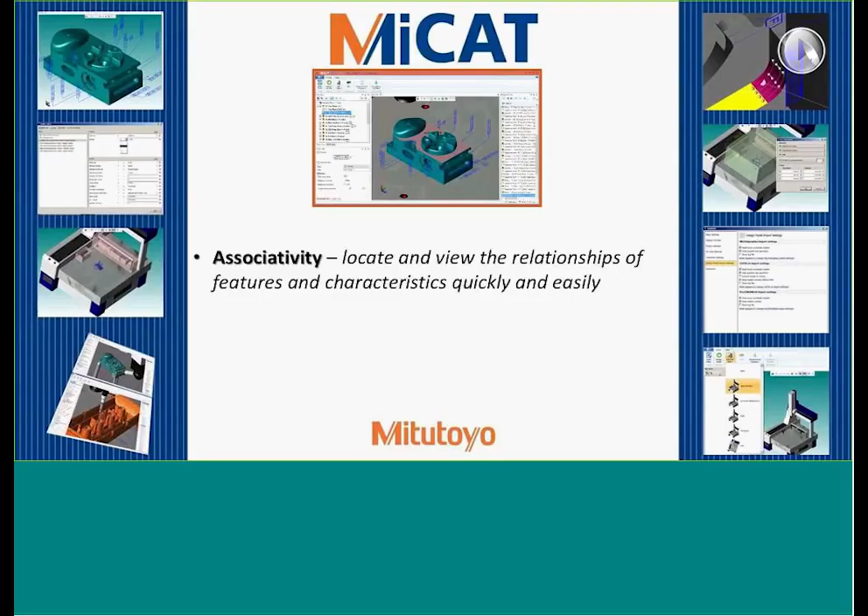Now, this is something that's very important as well. This is adding GD&T. What if I have a model that's just geometry only, and what if I have a 2D print? Well, this is an example of how you can use the planner to add GD&T to a model. Selecting a feature and saying, hey, this is the plane. I think it's the plane, and the user is confirming, yeah, that's the plane.

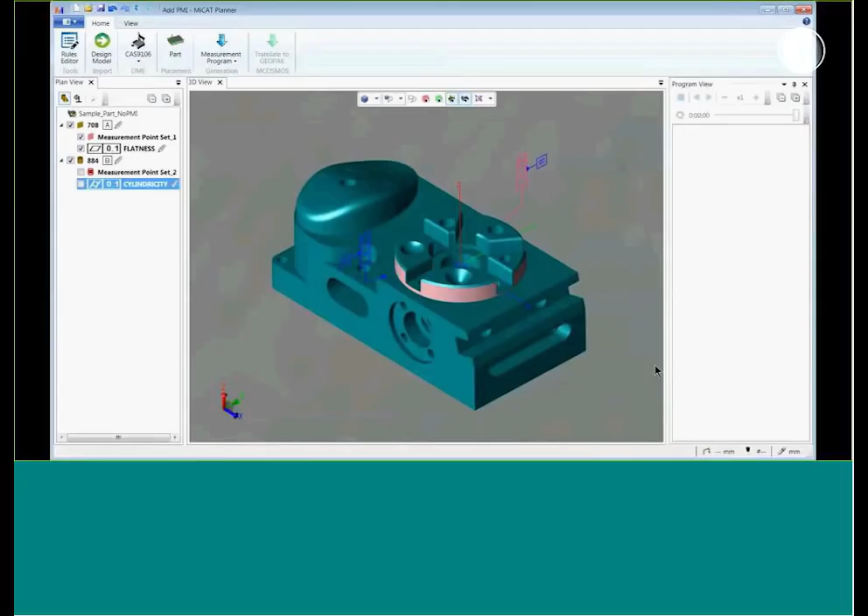Now, I just said, okay, I've got a plane. What can I do with it? I can set that as a datum. Automatically set it as datum A or as any datum label as well. And as quick as I can talk, I just did flatness as well. Now we can add another feature. This particular feature can be a circle or it can be a cylinder. Now I'm going to set that as datum. You can see the feature control frames pop and the datums pop as well in the 3D view.

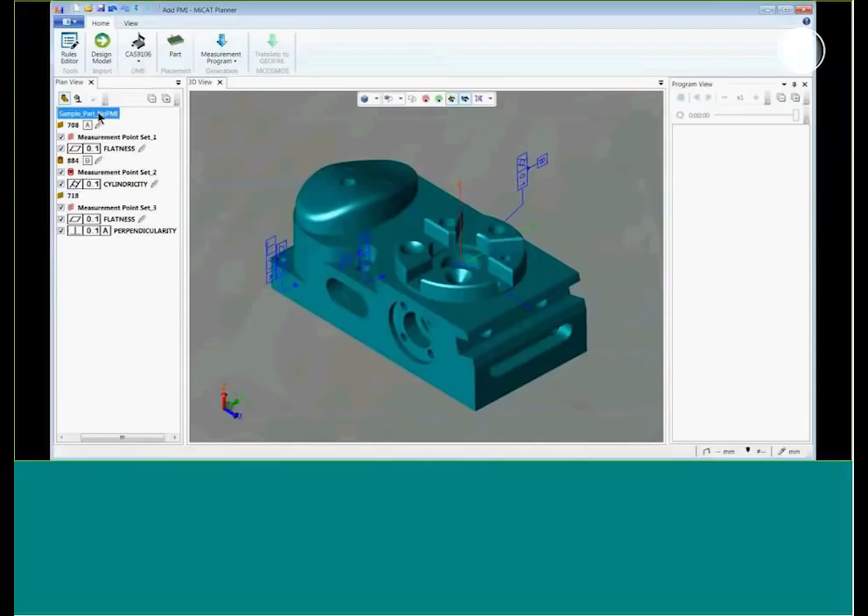So I've done that now, and I want to pick another feature. It's a plane. Okay, what can I do with that plane? In this case, I want to add a characteristic, flatness again, and I'm also going to add perpendicularity. And so in that period of time, I've just annotated those three features with semantic GD&T, with datum labels, and I've got now a measurement plan that I created from a 3D model.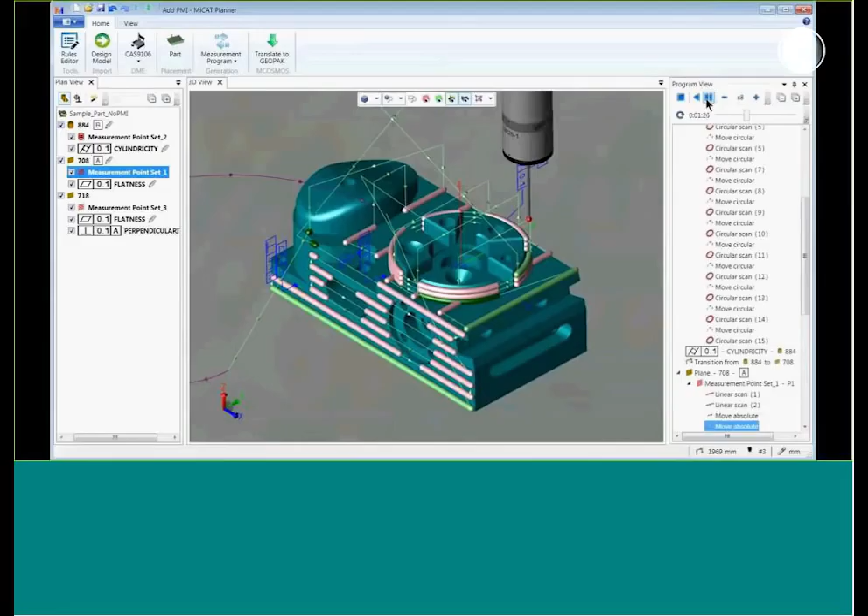I said, create a measurement program. In this case, I'm doing scanning, and we'll execute. So in about as quick as I can talk, which isn't very fast, but this thing works a whole lot quicker than I do, I've generated a part program from a 3D CAD model that had no GD&T. I'm still kind of amazed when I see this myself, and I've been looking at this now for a little bit of time. It's really a game changer.

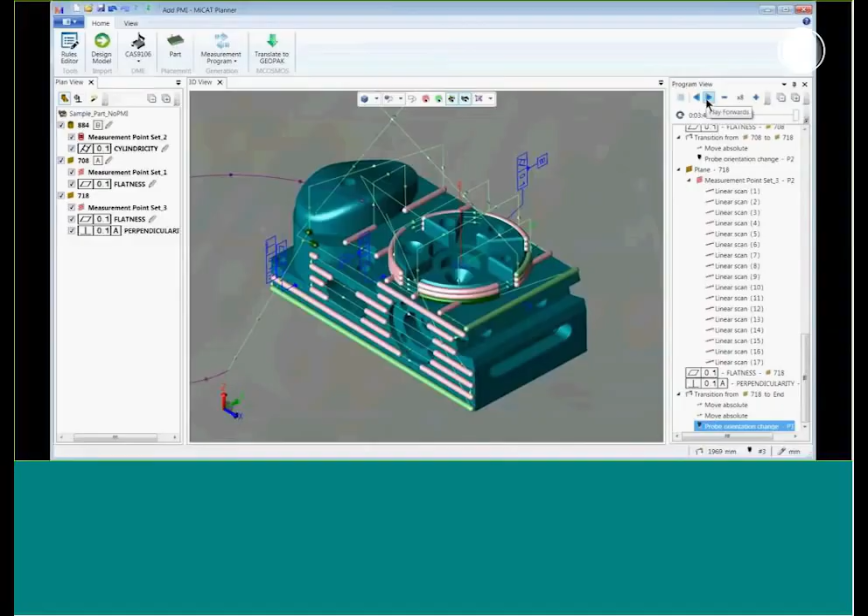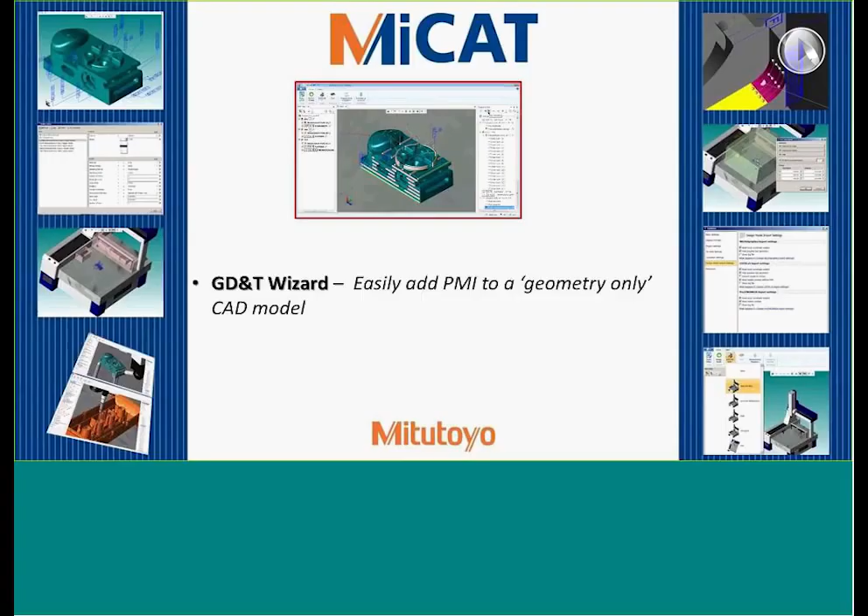We're done. Now, if I wanted to post that and execute, and I had that part on the machine and was set up and oriented, I'm good to go. So, you know, the feature here is we have this thing called a GD&T wizard, and it really makes it easy to add PMI to a geometry-only CAD model. All right, let's move forward.

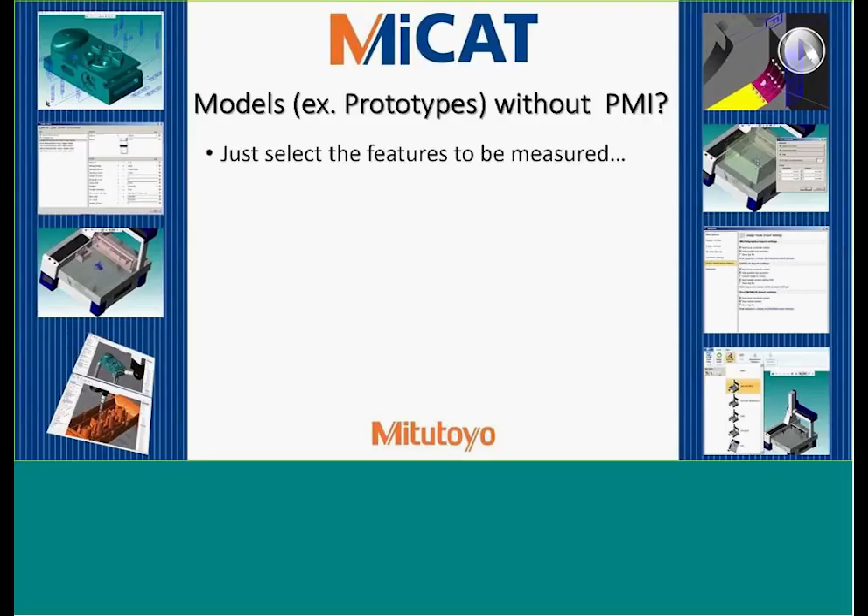What about a prototype? What if I don't have any PMI? What if I just don't care? I just want to measure stuff. Well, we can do that as well. We just, as we showed before, select the features to be measured, but instead of taking that extra step, if you don't want to, don't add the GD&T. Say, hey, I want these features. I've got a measurement plan, and I want you to measure that.

This is very useful maybe in a prototype workflow, and then when the GD&T gets worked out later, you can bring that model back in and then add that GD&T, or if it's in the MBD, you can import that directly and use that GD&T from the imported MBD. So that's an alternative workflow, but a very common workflow as well. I just want to measure stuff.

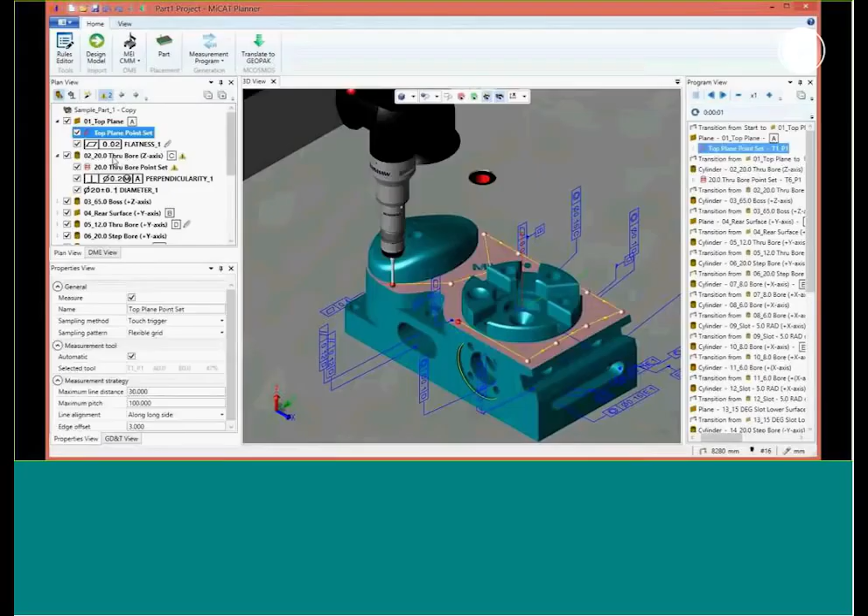So this is animating a selection, and again, it's a video, and this allows you to see that you can look at just parts and segments. By the way, in the plan view on the left-hand side, if I wanted to grab and reorder the basic sequencing, I can just drag and drop, and it reorders automatically. You can see the associativity of the top plane to the top plane measurement point set, and you can see the associativity in the program view as well.

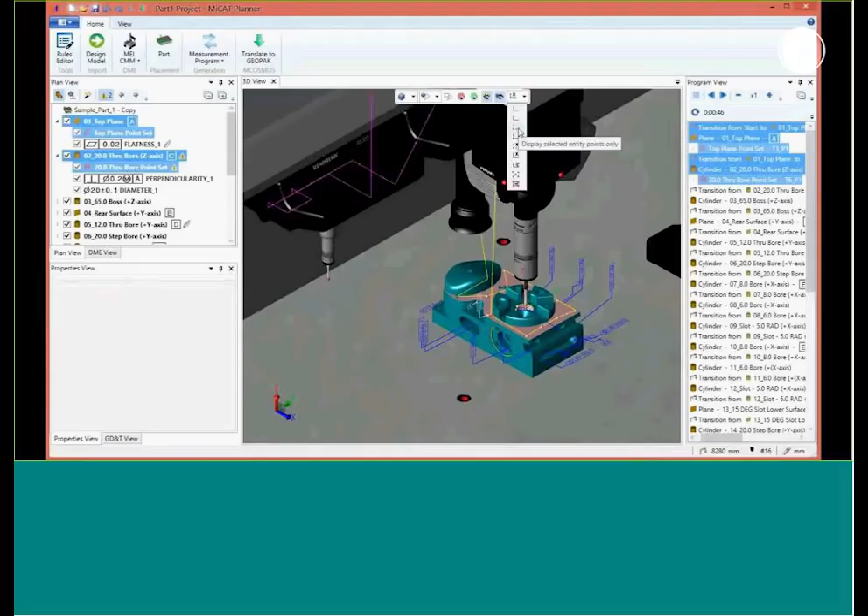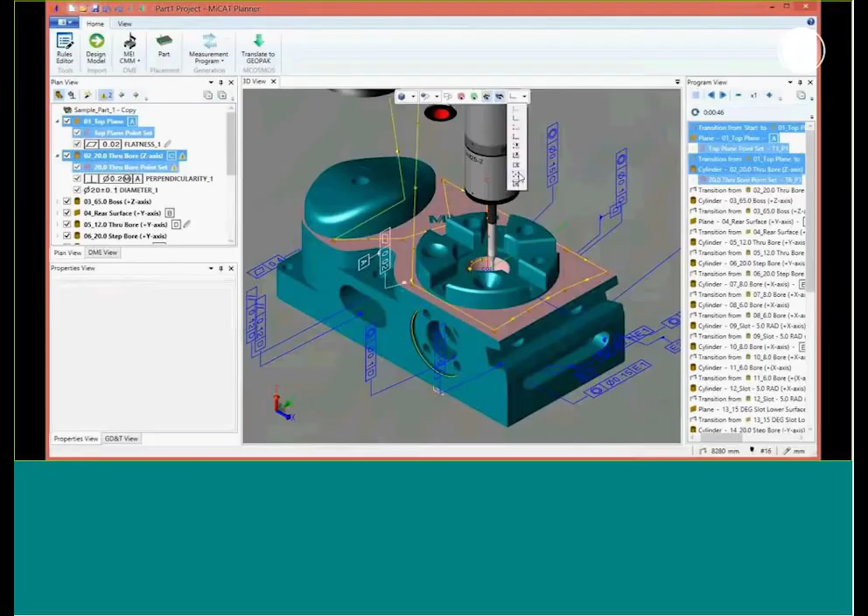And maybe I want to execute, and I'll show you that in just a second, just the segment of that measurement program. So zoom out a little bit, you can see the path. You can see the cycles of change to the change racks. Okay, I've got it set to where I want it. And let's do, like that view.

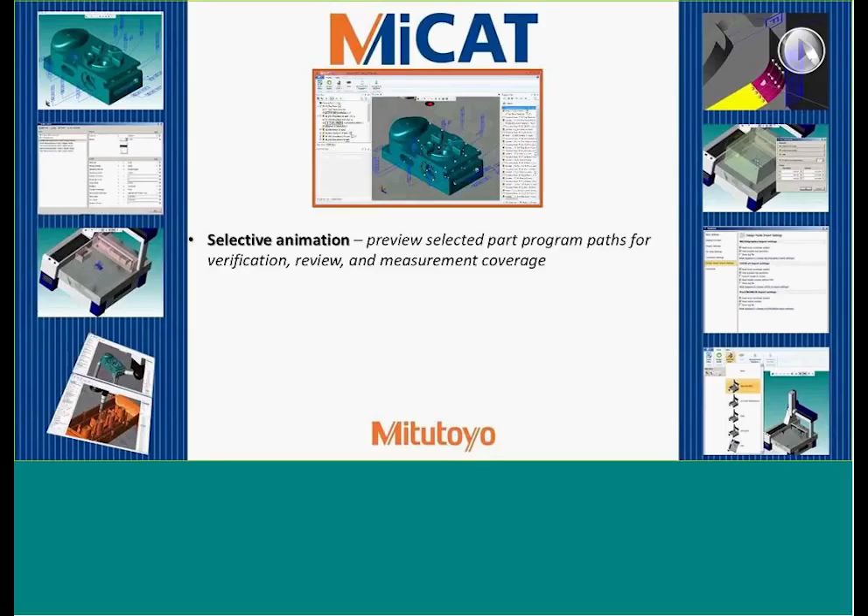So you can preview selected part program paths for verification, review, and measurement coverage. If you want to animate, you can. If you just want to look at it in static mode, you can do that as well.

Let's look at the overall MiCAT Planner benefits and summarize what we've seen. It's a streamlining of processes. It really makes the model-based inspection workflow zing. It improves productivity. It reduces manufacturing costs. Measurement and inspection are part of manufacturing. And anytime you can reduce costs, that's an important issue for anybody who's involved in manufacturing.

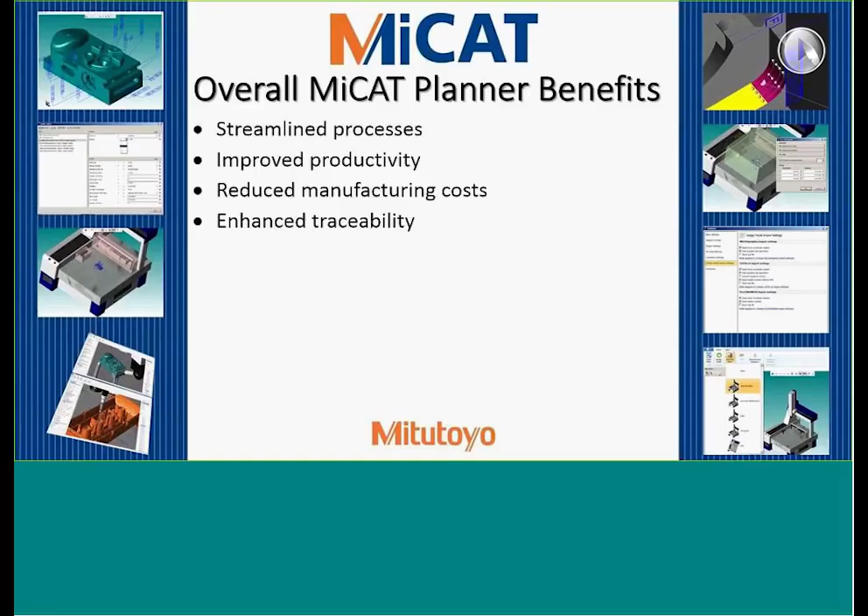It enhances traceability because you've got these associativities all the way back to the rules. You've got the associativity back to the particular DME that was used. You've also got the associativity back to the model-based definition. And we think up to a 95% savings in time compared with drawing-based methods.

And this is the key thing. When you move to a fully model-based environment, you will only have to supply a single CAD model to inspect the part. And that's important, and that really simplifies the relationship with suppliers as well.

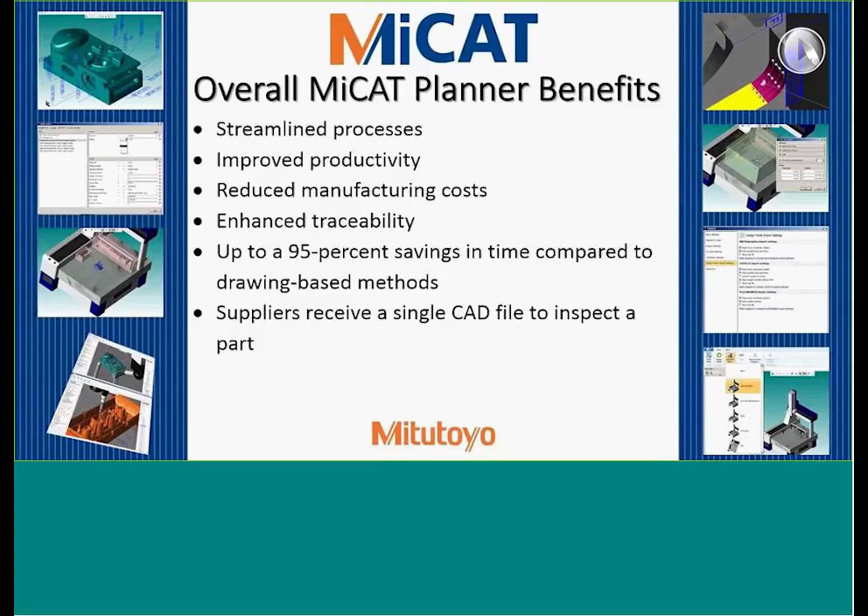Some additional MiCAT Planner benefits. Features and characteristics are directly transferred into the inspection software, reducing the risk of misinterpretation. This is a big one. We all try to be as good as we can, but sometimes we hit the wrong button on the computer when we key that stuff in from the print.

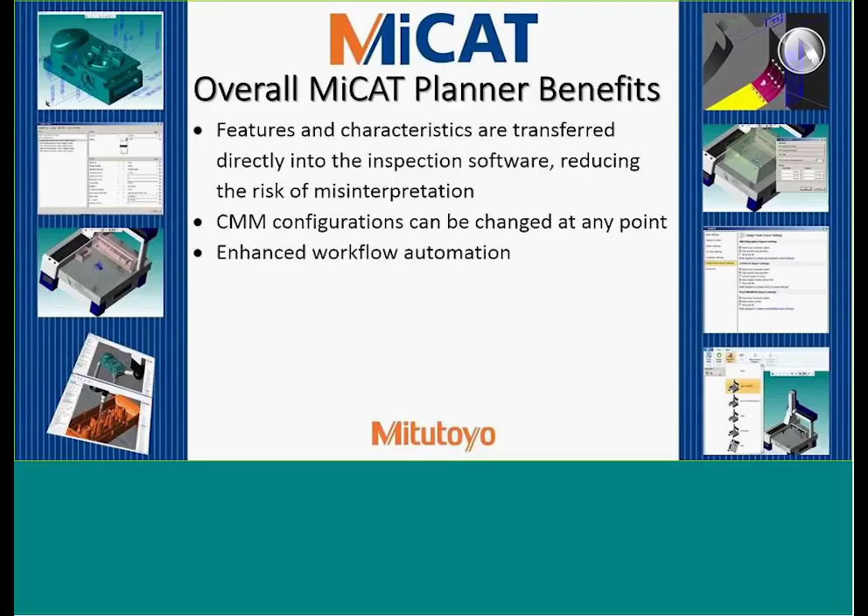CMM configurations can be changed at any point. We didn't show this, but it's very simple to say, oh, I've got this CMM, but it's not available. Can I use that CMM? And you simply say, okay, select it from the pull down, and you're good to go. Enhanced workflow automation, which is very, very important. Time is money these days, and the MiCAT Planner really puts that money back into your pocket.

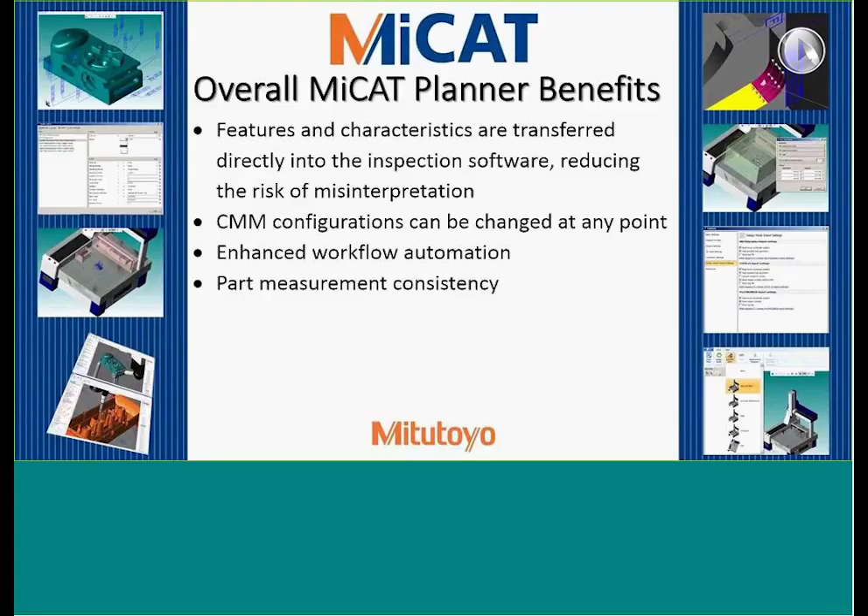And then, most importantly, maybe is part measurement consistency, because you've got these captured rules that you can apply and reapply in a consistent manner. With that, this is the end of the presentation. I hope there's some questions.